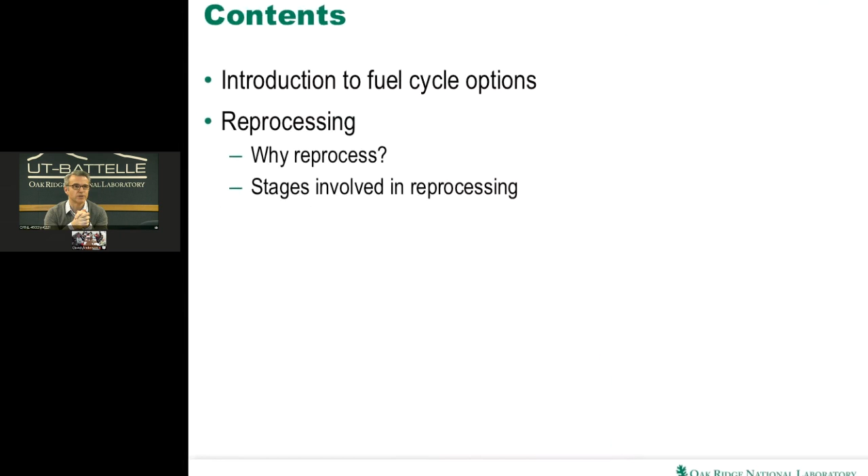So what I'm going to talk about is I'm going to introduce some of the fuel cycle options. There are multiple out there, several hundred, if not thousands, of options. I'm not going to cover all of them, of course, but I'm going to cover a few of the major fuel cycle options that are being considered today and for the future. I'll then move on to talk about reprocessing, why reprocess in the first place, what's the benefit of that, and also some of the stages involved in reprocessing.

And then I'll move on to recycle. Why are people considering recycle? What are the advantages and purposes in recycle? And in particular, we talk about recycling the plutonium and the reprocessed uranium. You can reprocess minor actinides, but that's not a subject of this topic. But just again for background, you can actually recycle the minor actinides too, but I won't talk about that today.

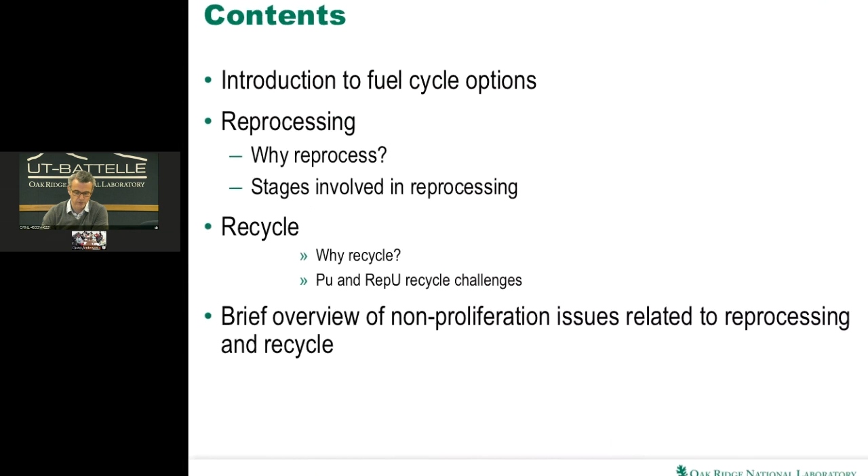And then what I also wanted to do was just touch on some of the non-proliferation issues related to reprocessing and recycle. Again, that in itself is a huge topic that we don't have time to cover today, but I will touch on some of the elements of that and how, despite popular belief, reprocessing can and is being done under a safeguards regime, and there's no issues associated with the non-proliferation. And then finally, summary and conclusions.

So, despite what you may think, I have no accent. It's you guys that have the accent. So, I actually have been with ORNL just for the last about 2.5 years. Prior to that, I was with the UK nuclear industry, as you can probably tell by my accent. I'm not from East Tennessee. I'm actually from the UK.

So I worked for a company called British Nuclear Fuels Limited, BNFL, who actually no longer exists. So depending on the age of the audience, you may never even have heard of them. But BNFL was an equivalent company to Areva. BNFL were involved in everything from fuel fabrication to operating reactors, to then taking the spent fuel and reprocessing it. And that was a commercial business. For many years, BNFL was the largest earner of Japanese yen for the whole of the UK, because of reprocessing. And then dealing with the waste management issues and the back end of the fuel cycle and so on. That was BNFL's business. So I used to work for that organisation.

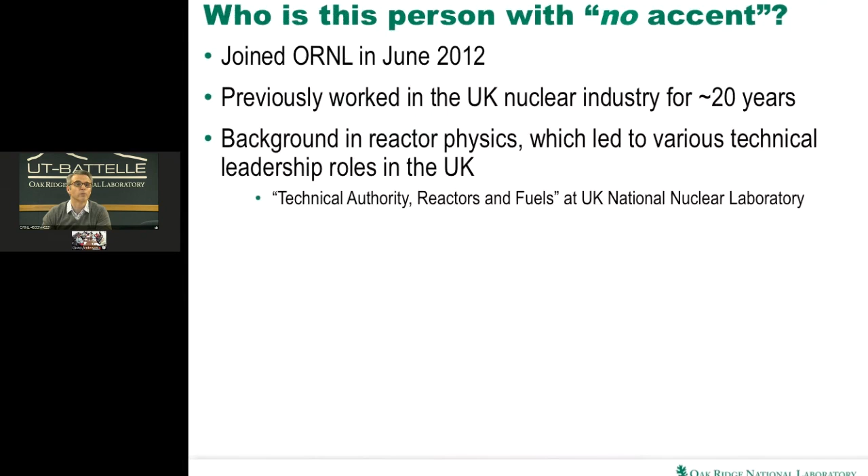And in fact, my background is not reprocessing or indeed anything to do with the fuel cycle exactly. My real background was reactor analysis, reactor physics, but very quickly I got involved in BNFL's broader business, which was plutonium management. And as part of plutonium management and the potential to recycle plutonium in reactors, which I'll talk about shortly, suddenly you get involved in much broader aspects of the fuel cycle, including weapons plutonium disposition and so forth. Eventually I was part of the UK National Nuclear Laboratory, where I was the technical authority for reactors and fuels, advising the UK government on plutonium, but also new nuclear build, advanced fuel cycles, thorium fuel cycles, and a whole range of other things.

I also got involved in a whole range of academic lectures, and I was a Royal Academy of Engineering professor at two of the leading UK universities. But in general, my interests in nuclear are very broad and wide. I'm very fortunate that I've done everything from pressing my own fuel pellets. I've seen plutonium being fabricated into new fuels. I've seen commercial and fast reactor fuel sheared and reprocessed. I've been very, very fortunate in my career. So hopefully I'll try and explain some of those operations and experiences to you today.

Okay, so introduction to the fuel cycles. What are some of the drivers for energy supply? If you just think for a few minutes and put yourself in various people's shoes and look at these different perspectives, whether that may be an operating utility, a government, a vendor, whoever it may be, there's a whole range of different things that you need to think about in terms of energy supply.

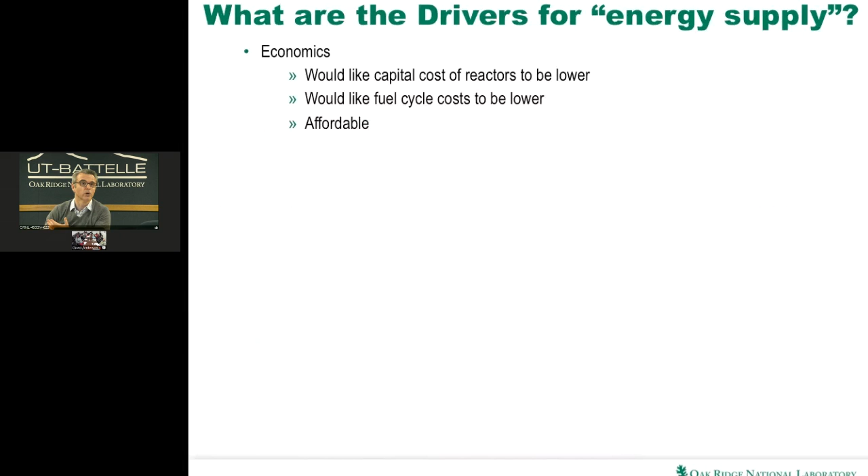And the classic one everybody would typically think of would of course be the economics. You might look at reducing the capital cost, you want the fuel cycle cost to be lower, and of course overall it has to be affordable, otherwise you wouldn't consider it. So that's one of the drivers for future fuel cycles.

Sustainability is becoming ever important. The US is in a very fortunate position that it has a huge supply of natural gas and oil. Not so much on uranium, only producing about 9 or 10% of the world's uranium, but something the US will need to think about in the not too distant future is sustainability and coming up with future energy options, including nuclear, that are sustainable. And I hope we all agree that we need to do more with the resources we have rather than just waste them simply because we have them at our disposal.

Waste management is something that everybody always talks about with nuclear, and quite rightly so, and I'll touch on some of the details later, but some of the drivers for future energy growth from a nuclear perspective are things like repository performance and what's called intergenerational equity: we don't pass on the problems of this generation onto future generations. So dealing with the waste is incredibly important, and how we fix that.

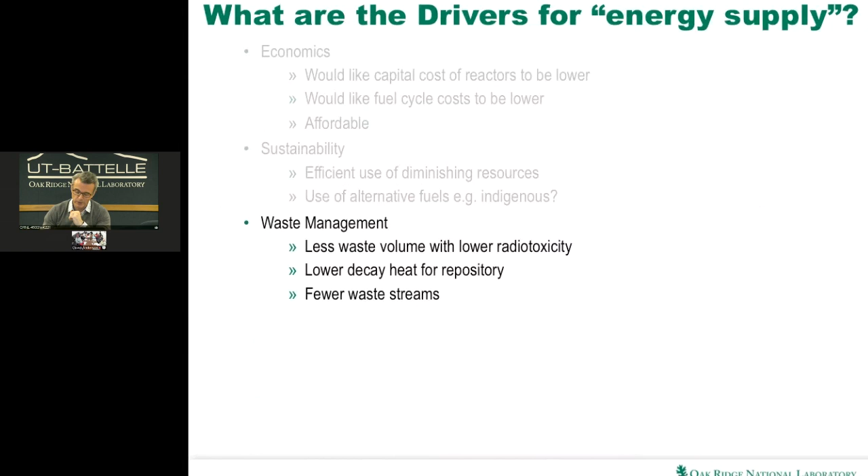Of course, safety is really important, and that includes not only operational safety for the public, but also security and physical protection. And it wouldn't be right to talk about these things without thinking about proliferation resistance. But what does non-proliferation mean? Well, it means making sure bad guys don't get the materials, but also they don't get the technology that they can misuse, and also the knowledge that they can misuse. We have to protect all of those.

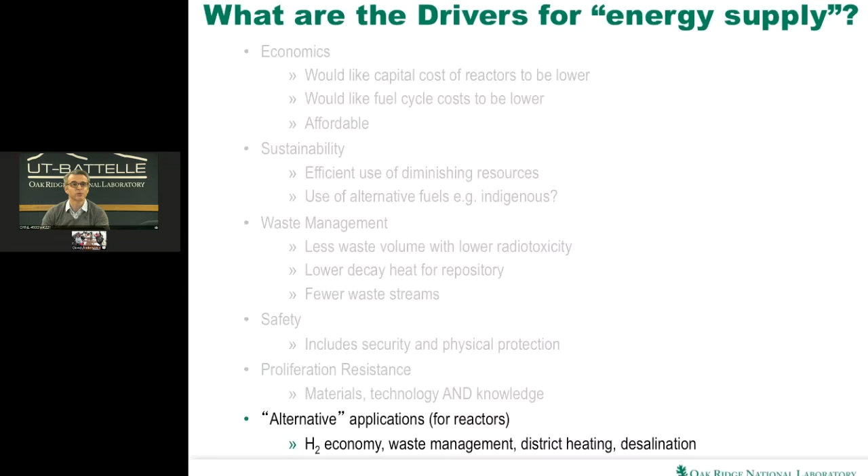And then the final thing we need to think about with energy supply, particularly for the role of nuclear, is broader than just electricity. This is something other parts of the world are desperately thinking about. For example, if you look at the water demands around the world, and potable water in Africa, it's a very small percentage of people who have access to clean water. So things like nuclear for desalination are incredibly important, not just for electricity generation. In some parts of Europe, in the Baltic states, district heating is incredibly important, and also things like a hydrogen economy, even for transport. So all these are broader concerns, questions, challenges we have to address when thinking about nuclear.

And what that means is when evaluating a fuel cycle option, we need to think of it from all these people's perspectives: the operators, the governments, international agencies like the IAEA, but also regulators and vendors, people who want to make money out of this, as well as for the good of mankind. The reason I mention all of that is that if we're not careful, we end up focusing on the best technical solution, not necessarily the best economic solution, or we don't think more broadly about how else this nuclear fuel cycle can have benefits. So that's why I wanted to mention that up front.

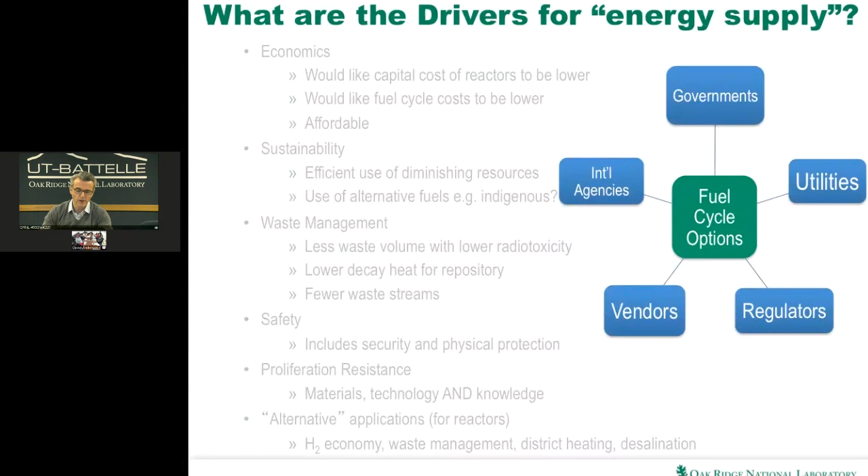But the key thing here is just to bear in mind that when you look at the once-through fuel cycle, everybody thinks of that as being complete. Well, in fact, it isn't. We as an industry, as a nuclear industry, haven't yet even demonstrated a once-through fuel cycle because we haven't yet done the ultimate disposal part of it, which is one of the major challenges for nuclear. So when people start talking about reprocessing and all these fancy future fuel cycles, you would also have to bear in mind that we haven't yet done the once-through fuel cycle completely either. So there's still plenty of challenges there.

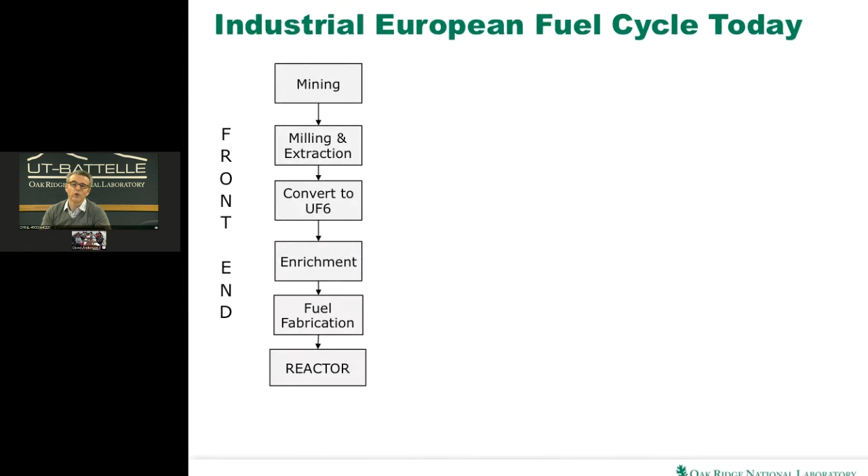So if we compare and contrast then, I just talked about mining, milling and extraction, converting to uranium hexafluoride, enrichment, then on to making fuel, and then all the way through to reactors. What we call that is the front end of the fuel cycle. So anything leading up to the reactor is typically known as the front end of the fuel cycle. If you have a front end, then of course naturally you have a back end of the fuel cycle, and this is where the options kind of diverge.

So what we can do is we can reprocess or we can store indefinitely. And as I just illustrated on the previous slide, the store indefinitely is the current once-through fuel cycle, the US fuel cycle. If we're to reprocess, in Europe, we typically have generated 3 levels of waste streams known as low-level waste, intermediate-level waste, and high-level waste. The classifications aren't so important, but I just wanted to demonstrate there's a whole range of waste streams.

Two of the major byproducts we get from reprocessing, though, which we can do something else with subsequently, i.e. the recycle part of it, is we generate uranium and plutonium from the spent fuel. And typically we can store that, and that's what's been happening, for example, in the UK. But alternatively, we can take that uranium and feed that back into the uranium fuel cycle and re-enrich and so forth. Or we can take the plutonium and make that into what's known as MOX fuel, mixed oxide fuel of plutonium and uranium, and directly put that through a fuel fabrication process and back into the reactor. And those are the stages I'm going to go through in a little more detail, but I think it's worth giving you an idea of what that layout looks like before we start in the details.

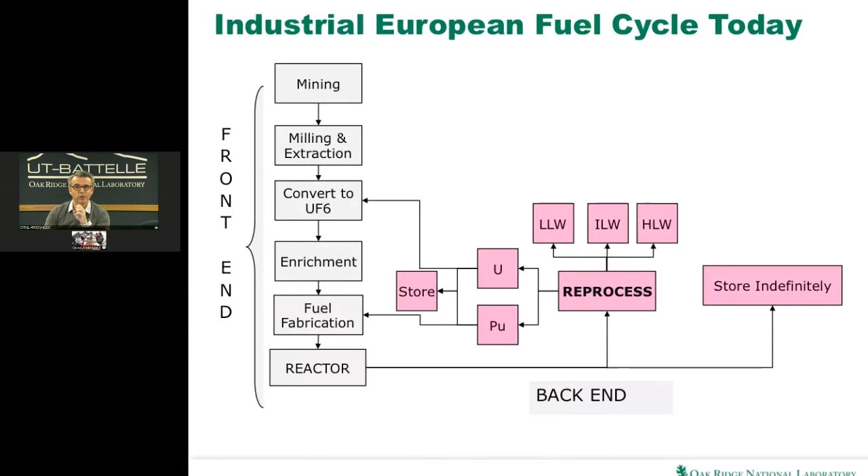So, there's a couple of different phrases you sometimes hear with fuel cycle options. Simply put, they're either open or closed. So the open fuel cycle, or the once-through fuel cycle, as I said, is the US. Basically take the uranium ore out of the ground, make it into fuel, put it in a reactor, put it down the hole in the ground. That's known as the once-through or the open fuel cycle.

The full recycle option, but this isn't where we are today, this is where you need fast reactors and these fancy future reactors, is we again do the same thing, recover the ore, make the fuel, put it into a reactor, but now we then recycle. We separate, first of all, the good stuff and the bad stuff. The bad stuff we don't want, we put it down a hole in the ground in the repository. The good stuff we recycle as fuel. And that's known as the closed fuel cycle. So the open fuel cycle, no recycling or conditioning of the used fuel, which really means low uranium utilization.

On the other side, though, the closed fuel cycle is we can multiply reprocess the materials as many times as we can, and also transmutate the minor actinides, as I mentioned, is one option, and that's complete uranium utilization. It's as much as we can possibly do. And just for your complete understanding, there are stages in between, which is typically called the modified open fuel cycle, or limited recycle as it's also known. And that's pretty much what France is currently doing.

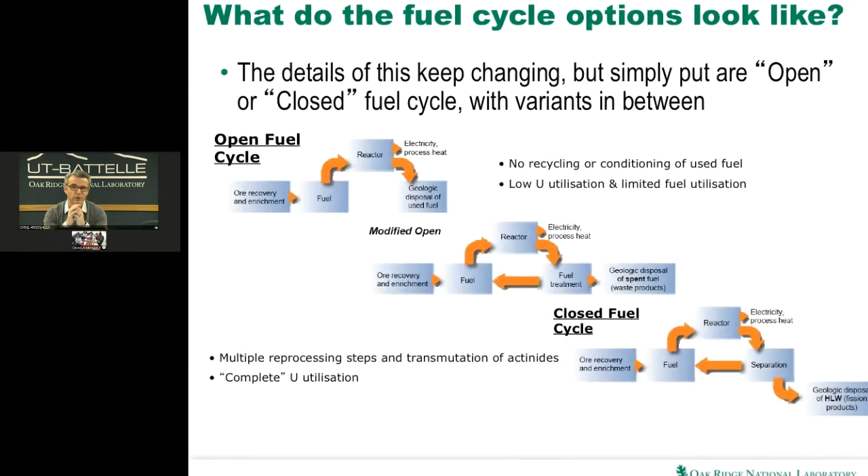France is right in that middle one in the modified open, because what they're currently doing is they're taking the plutonium and the uranium and recycling it, but not to the extent where you can do that infinitely. They're only doing that in light water reactors. And again, I'll touch on some of the details later, but you can only do that once or twice because of the fissile quality of the material recycling. And then the minor actinides and the fission products are then disposed of directly. So that's where it's modified.

So some of the drivers that are being considered right now are things like we need better utilization of limited resource. Despite what people say, there are only finite resources out there for uranium, just like oil, gas, and whatever. If you look at the OECD and the IAEA, they quote something like 60, 80, maybe up to 100 years of known uranium resource that's available today based on a certain growth scenario for nuclear over the next few decades.

But the important thing to bear in mind with that is that that's what's known today. Every time somebody's gone and prospected and looked for new uranium, they've found it. But you don't go and look for it unless there's a shortage, and there is not a shortage today, so people just don't go and look for it. Same with any other commodity.

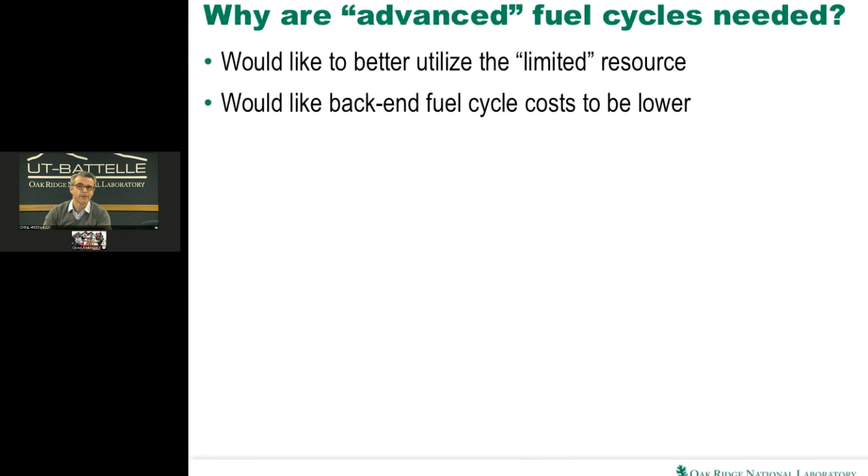The second driver for these advanced fuel cycles, we want the back-end fuel costs to be lower. Things like the waste, which I'll touch on shortly, and the impact that may have on repositories and the cost that drives your repository. There's plenty of good reason why you want to recycle. There is a lot of perceived proliferation risk posed by reprocessing and plutonium separation. I say perceived because the risk really is there for sure, but the perception is almost that that's a greater risk than other fuel cycles.

And again, I'm not going to go into it in detail now, but if you Google or look up work by a guy called Charles Bathke, then you will see things like material attractiveness, figure of merit, where basically analysis by people like Los Alamos and the other weapons labs illustrates that all fuel cycles, all of them, generate material that is potentially weapons grade material. What that simply means is, therefore, every fuel cycle needs safeguards and security. So that's not to say plutonium is any worse than anything else.

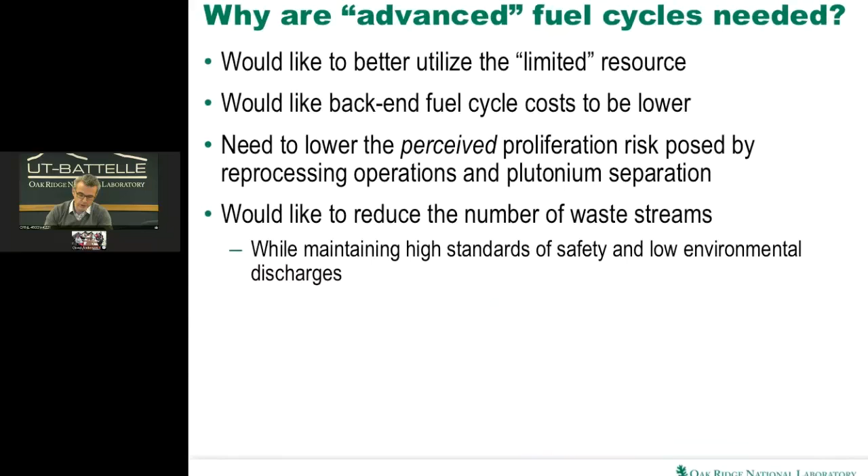For example, in the uranium fuel cycles of today around the world, where plutonium is not separated, we still have to have safeguards and security. So just to illustrate, there is not a great game changer there. We're also trying to simplify the number of waste streams and reduce the impact on the environment. And also in the meantime trying to maximize the benefit and the improvements we have in the existing fuel of today.

One point to bear in mind though is that for these ultimate long-term future fast reactor fuel cycles and these completely closed fuel cycles, you do rely on not just the fuel cycle technology but new reactor technology. So there's an awful lot of research, development and commercial case to be made. So things like developing future fast reactors or molten salt reactors are part of that. Okay, so that's just trying to set some of the scene, some of the language, and I'm going to go now into more detail and talk about each of the components of reprocessing and recycle.

So what is reprocessing first of all? Well, reprocessing is the separation of the reusable fissile material, typically the uranium and plutonium, and the recycle of that in new nuclear fuel. In many ways, this reprocessing and recycling nuclear is no different to the way we hopefully all at home recycle our garbage and extract the good stuff, the plastics, the bottles from the traditional household waste. It's just taking the good stuff out, separating the good from the bad, and recycling the good stuff. So this is what's essential to close the nuclear fuel cycle. You have to have reprocessing.

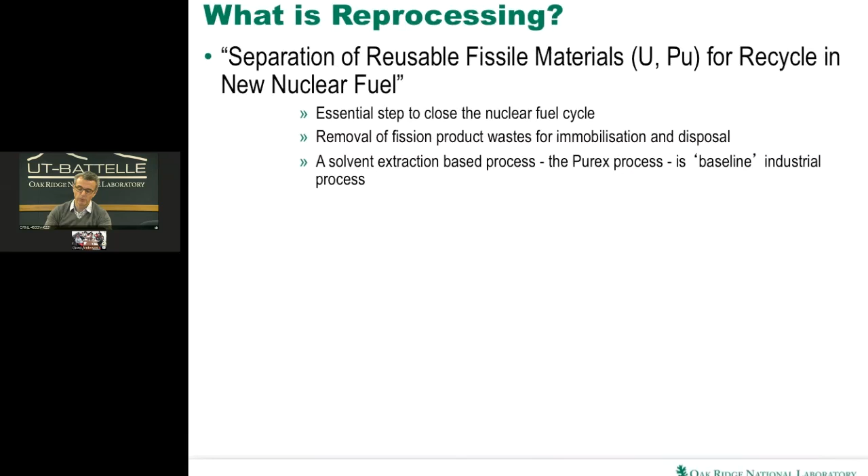Of course, if you fission fuel, uranium or plutonium in a reactor, that fission process generates fission products, and we want to get those out of the fuel. We don't need those anymore. They're definitely a waste product. We get those out, we immobilize and dispose of that, and all of that separation process is based on solvent extraction, a chemical process known as Purex, which stands for plutonium and uranium extraction. And that's the baseline industrial process of today that's used in the UK, in France, and in many other places.

There are other options other than Purex, and I'll touch on those later, but things like COEX means co-extraction. So where there are concerns that maybe plutonium could be diverted for a weapons program or some other mission, future fuel cycle options are looking at co-extraction of uranium and plutonium together so that you don't generate pure plutonium. And also looking at things like where the plutonium is kept with the minor actinides and the fission products under a Urex, and there's a whole range of other things. I'll show you some of those later.

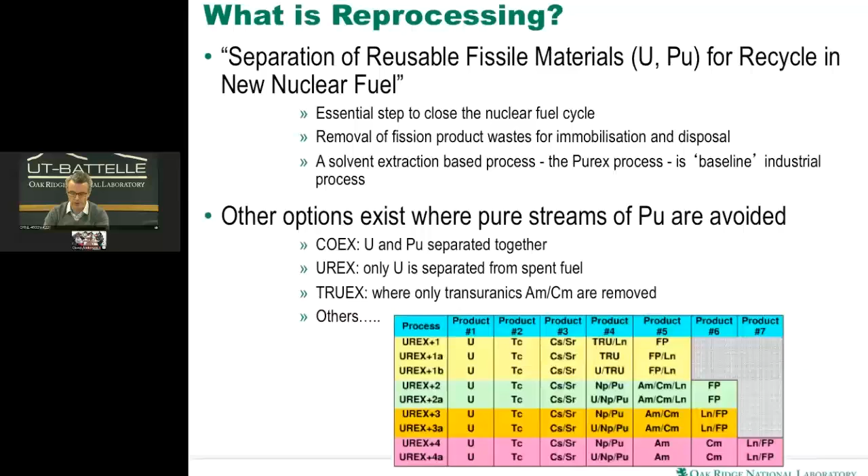So why bother reprocessing is often a question we hear, because not every country does it, and why would they? Well, the first thing is, historically, it's typically been because of the weapons program. If you look at the US, it has reprocessed historically primarily to extract the plutonium for the weapons program. The UK also did exactly the same thing; it was all about reprocessing to get the plutonium out of the fuel for the weapons program. So that's part of it.

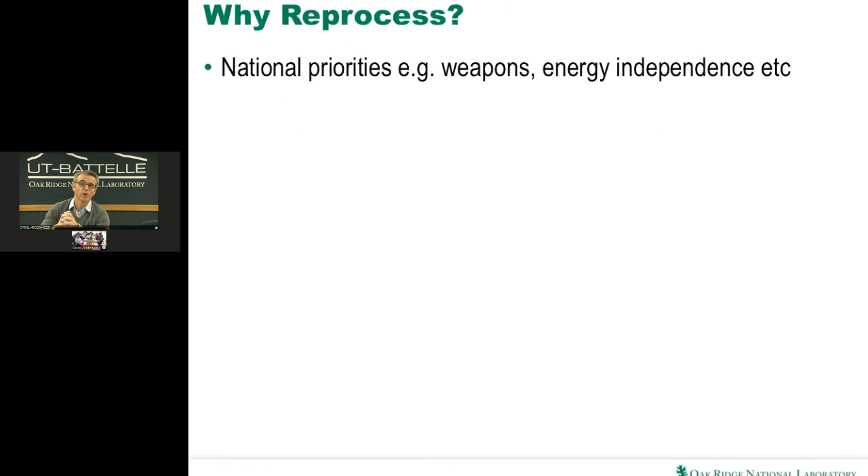But back to what I started the talk with, and that's energy policy and energy supply. One of the things that, for example, Japan faces is that Japan has no indigenous oil or gas or coal. So it has to do something to ensure energy independence, and that's why Japan is focusing very much on reprocessing and recycle. When they buy their uranium, they want to maximize the use of that uranium, and things like reprocessing enable them to do that, maximize their resource.

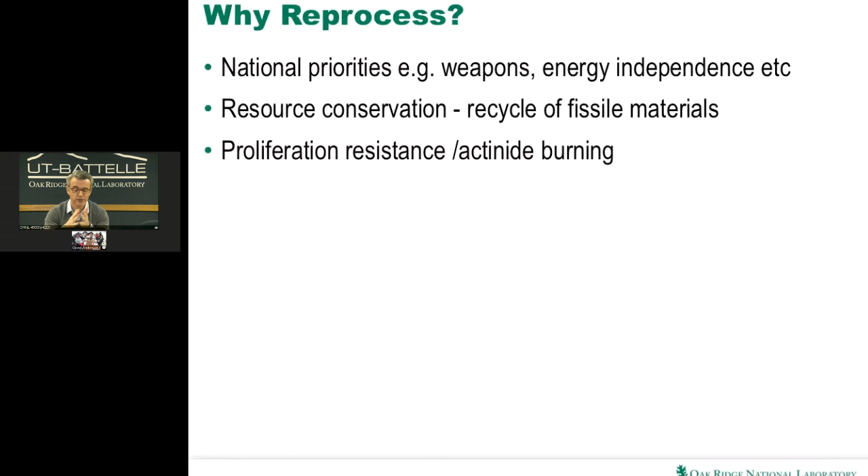I've touched on this one already, resource conservation and recycled fissile materials. Reprocessing, in fact, does have some proliferation resistance benefits with regard to the burning of the actinides in one sense, but also if you have separated plutonium for all sorts of reasons, then you can reprocess and recycle that to destroy that plutonium too. So that's another way of looking at it. You actually are destroying the plutonium.

Something I'll touch on and show you a couple of graphs shortly, in more detail, is you can use reprocessing to minimize the volume of waste, the volume of material that you're going to put down the repository for ultimate disposal. And similarly, spent fuel management: in spent fuel, you end up with a lot of fission products and potentially the weakness of the spent fuel. So potentially by reprocessing, you remove those fission products, you remove that weaker structure, the fuel pins and fuel pellets, and you then recondition, in a sense, into a repository condition.

And then with somebody like the UK, one of the reactor options they have was the Magnox reactors, the old graphite reactors. And in fact, they have to reprocess that material because the cladding that surrounds the fuel is actually a magnesium alloy. And it has to be kept under water because magnesium, we've probably all done this in high school class, try to light magnesium ribbon, it burns tremendously. That's not exactly a reaction you want to see in a nuclear fuel.

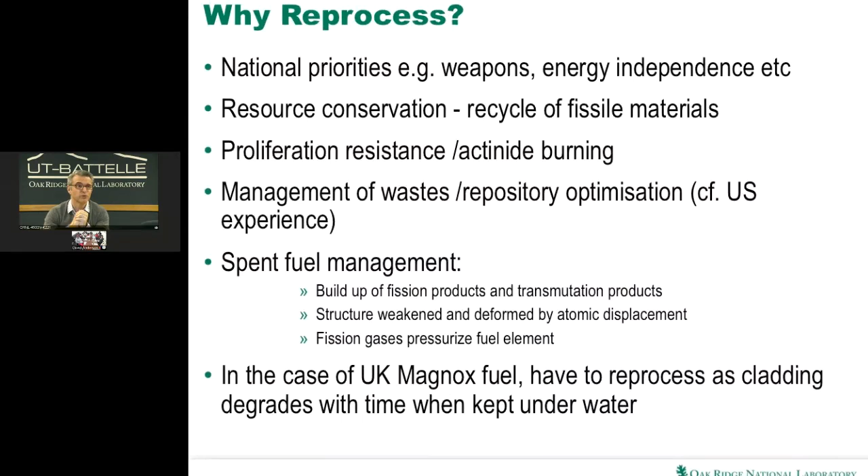So that means you cannot allow it to be exposed to air, so you have to keep it under water. Unfortunately, when you put magnesium alloy under water, it dissolves in water. So therefore, that's also not a good condition. You don't want your fuel to be dissolving in water. So that's why they have to reprocess, to put it in a much more stable form. So there's some of the drivers outside of economics.

So the obvious one to answer then, well, is reprocessing economic? And the answer is no. Well, yes, but the answer actually is maybe. It depends on so many different things. It's not easy to say for sure. And that's why some countries have gone down that route and others have not, as well as the drivers based on country policy. So it depends on a whole range of things. Often the approach to economics is one of the drivers.

The problem with a lot of economics, particularly nuclear economics, is you get this thing called discounted cash flow analysis. And what that really means is that anything a long time in the future, the value of that money is discounted away. So if you have an outlay in the future of, say, $500 million for a decommissioning project, or a repository is needed, if you put a small amount of money aside today, that money will grow by putting it into the banks or investing it. And so you don't need to put your $500 million in the bank today. You just put a small amount of money and watch it grow over the next 50 to 100 years.

So that same approach is applied here, where all the direct disposal costs are put off so long in the future that it discounts all the actual costs away. The costs kind of disappear.

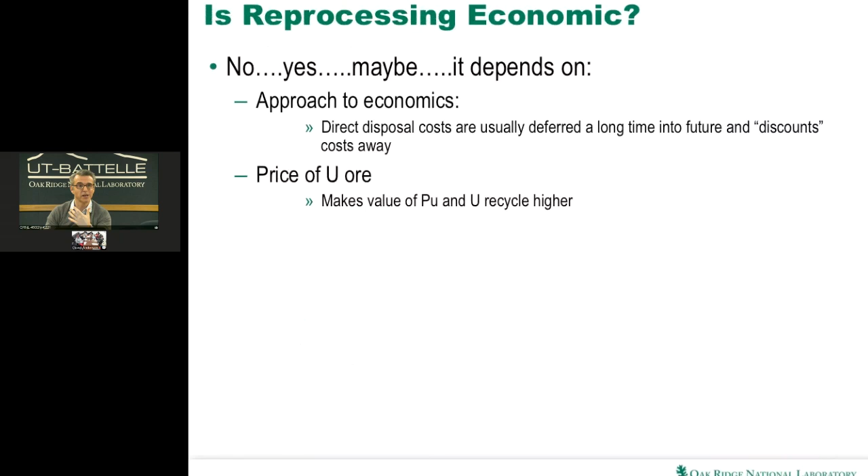The other thing that drives the economics of reprocessing as a yes or no is the price of uranium ore. If the price of uranium is very low, which usually coincides with lots of uranium around, then why recycle? We don't need to be so concerned with the availability of that resource. But if the price of uranium goes up, then suddenly the value of that reprocessed uranium and the value of plutonium to recycle also goes up.

The other thing as well is that you can achieve higher burn-ups in light water reactors. What you tend to find is that if you need to get more energy out of your fuel, you need to put more fissile material in there. In the case of uranium, you have to pay for that by enriching it. The more you enrich, the higher the cost, and that goes up exponentially.

Whereas with plutonium, if you've already made the decision to separate that plutonium out, plutonium is free issue at that point, because when you manufacture a fuel with plutonium, whether I put 1% plutonium into that fuel or 10% plutonium into that fuel, it actually doesn't increase the cost of that fuel production at that time. So what it means is I can get more energy out by doing that.

Cost of spent fuel, that obviously drives things also. But in general, the cost of the two, keeping irradiated fuel in a repository or the cost of reprocessing, they're comparable. And again, I'm not going into the details here, but these are some studies from the OECD, and I just updated some figures from 1993. This just shows and compares the direct disposal on the left with reprocessing on the right.

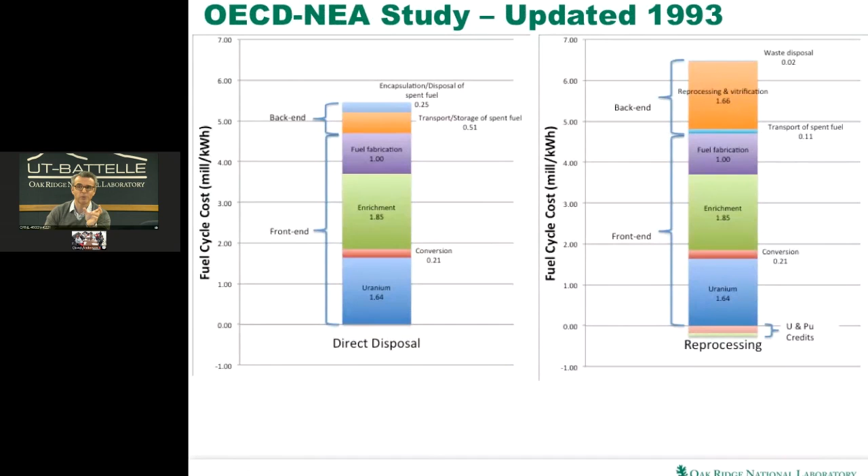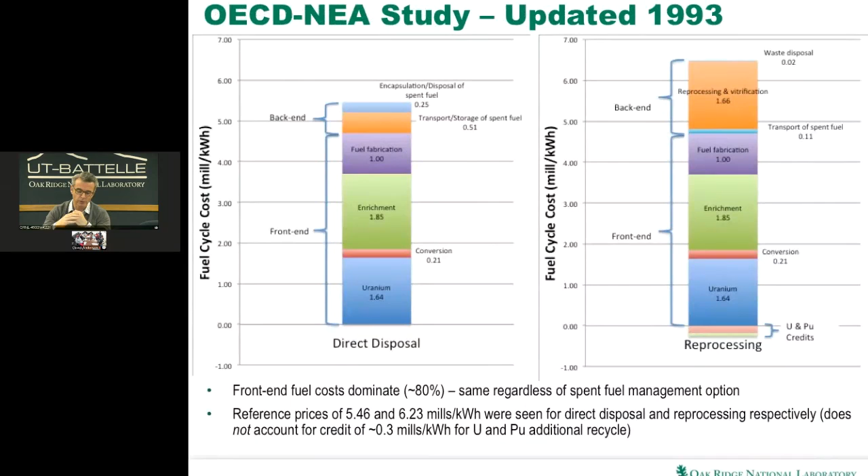Of course, all the front end of the fuel cycle components are exactly the same. It's only the pieces at the back end at the top of that histogram that change. And what you find is that the front end costs dominate. About 80% of the overall fuel cycle cost comes from fuel costs, regardless of which option you choose. And if you look at these two examples, we've got a comparison of about 5.5 mils per kilowatt hour versus 6, as you can see on the left and the right.

What the chart on the right takes no account of, though, is that the material that comes from reprocessing, the uranium and plutonium, we can recycle and reuse, and therefore that's an avoided cost of us having to buy more uranium. That's not in that chart. That equates to about 0.3. So when you look at the value overall, they're pretty comparable, within about 10% of each other. And of course, the things on the left can go up or down, the things on the right can go up and down. So within uncertainties, they're pretty much equivalent.

So when we talk about reprocessing and recycle, which bits are we talking about recycling and which bits are we talking about throwing away? Well, in fact, more often than not, what's typically been talked about is just reprocessing and recycling the fuel pellets themselves, the actual fissile material and the pieces that are inside the mechanical hardware of fuel.

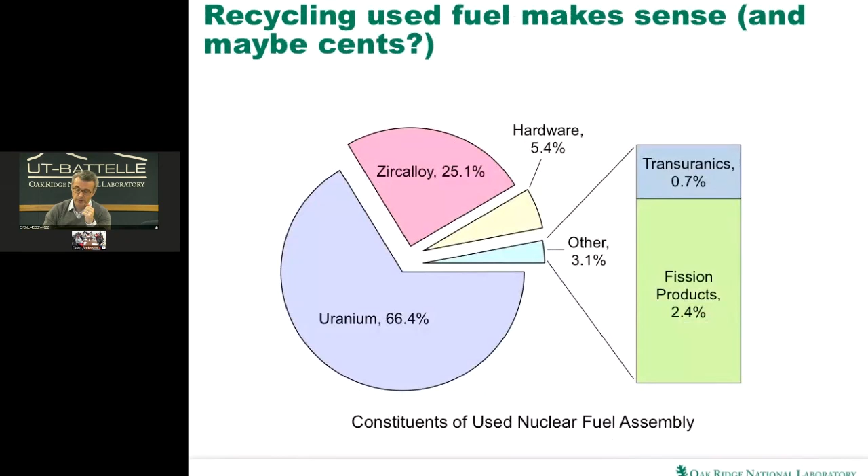But in fact, here at Oak Ridge, working on a US Department of Energy program, one of the things that's also being looked at is recycling the zircaloy, the actual cladding that's in the fuel and the hardware, and actually recycling the metal as well as the fuel inside those metal components. So that's something else to bear in mind. It's not just necessarily recycle and reprocessing of the fuel material.

Well, it's the radioactivity you can consider either as the dose to an operator, or the dose to the public, or the dose to the repository. Or alternatively, you can look at that as meaning the decay heat, the amount of heat that spent fuel is generating. So what you find is that the vast majority of that material in that spent fuel is actually producing hardly any of the decay heat or radiation in that fuel. In fact, the majority comes from the fission products.

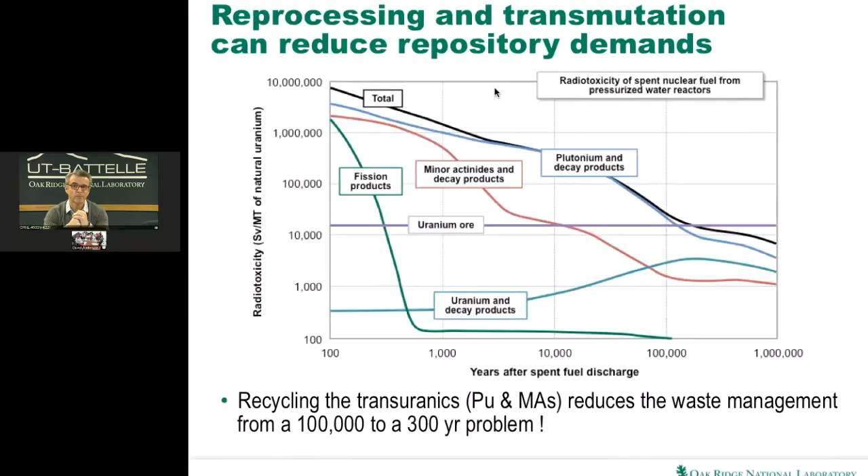because after about 300 years you're back to that background level of uranium ore radioactivity. Whereas if you didn't do that, it takes you 100,000 years or more before you get to those background levels. So that's what that graph shows you. It's showing what I said earlier in a slightly different way.

So the US is considering how to move to one of these advanced fuel cycles today. One of the programs of work within the US Department of Energy is something called the Fuel Cycle Options Campaign. So we're looking at a whole range of fuel cycle options, whether that's with fast reactors or thermal reactors, with thorium or with uranium, and a whole range of other things. And again, you can find those reports and studies on the web.

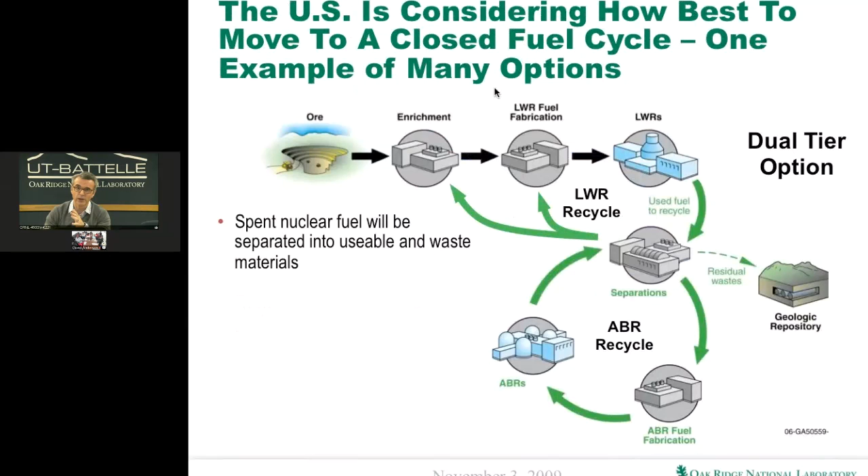But the key thing here for the US is those options are being considered. The once-through fuel cycle is still the fuel cycle of choice. It produces 20% of electricity in the US, so at the moment there's no point to move away from that. So again, I'm not going to go into that in detail, but just wanted to let you know there are other options out there that the US are considering today.

So just to demonstrate some of the steps in reprocessing, and again I'll show you some pictures and diagrams to bring some of this home, I hope. What you're seeing on the right hand side is a picture of the Sellafield reprocessing plant in the north of the UK. You're seeing the building right in the centre there with the red side; they're not chimneys, that's the side of the building. That's the thermal oxide reprocessing plant known as THORP, at Sellafield in the UK.

So at the bottom of that picture you see a square building. That's where the fuel is received and stored. So that's the first step, receipt and storage. The second stage after that is what's called the head end process, and I'll show you some pictures and schematics in a second. So the first step after the material has been received and stored is then to expose the fuel pellets themselves from inside the cladding.

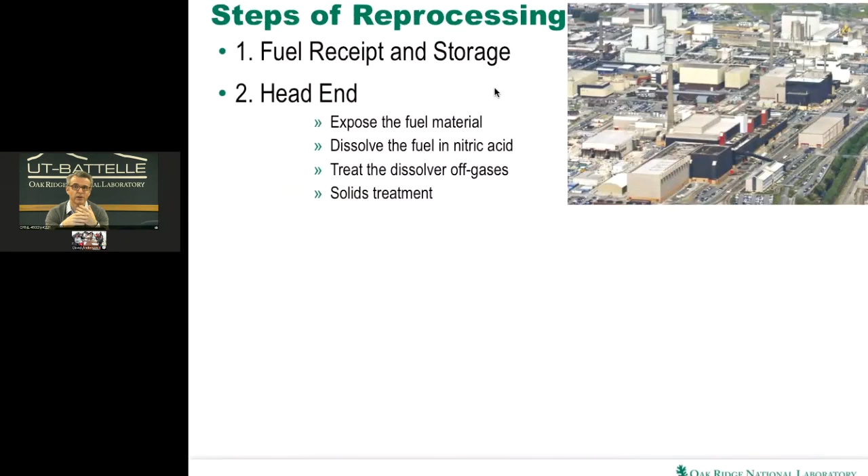So the first thing that has to happen is we have to expose that fuel by shearing it and basically shaking out, removing the fuel from the inside. We then dissolve those fuel pellets in nitric acid. Of course, by doing that, we generate some off gas. We have to treat the off gas, and then we dissolve and treat the solids.

The first two steps, that receipt and storage and head end, the steps are usually the same in terms of that they happen, but depending on the fuel type or reactor type, there may be some additional steps. And again, I'm not going to go into that, but I just wanted to flag that if you talk about reprocessing fast reactor fuel, the receipt and storage and head end processes will differ from what I'm about to describe now, but they are similar processes still needed.

The third stage, after you've received the fuel, you've dissolved, you've chopped it up, is that you now need to chemically separate all those elements that I described. And then once you've separated them, you need to purify them to put them in a form that can be reused if appropriate. Typically that's done using the Purex process, as I mentioned earlier, using solvent extraction, and that's with chemical separation. But again, just a little marker here, there are alternatives for things like fast reactor fuels, which is known as pyro reprocessing, using something like a molten salt or electro refining. I'm not going to go into that today, but just to flag that there are alternatives.

And then once you've gone through all that, you'll need to store that material for potential future reuse. And the material that you're no longer going to use, you then have to do something with it, like waste treatment.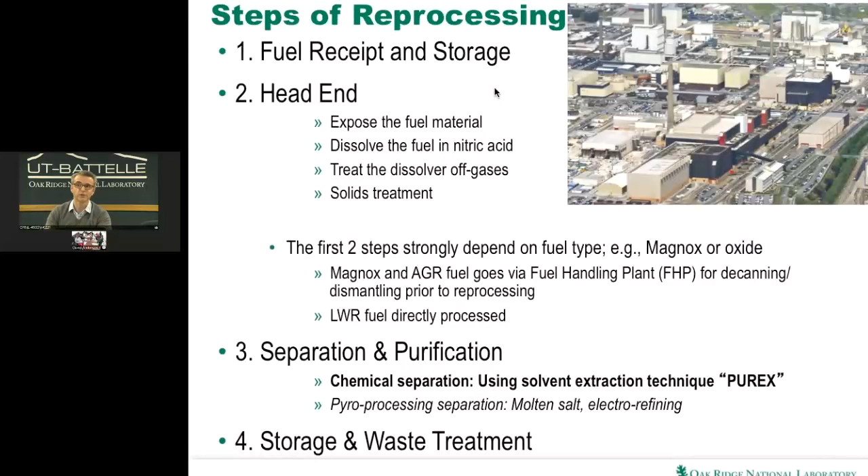So this is just to show you some schematics, and I'll show you some photographs in a second of what this looks like. But just stepping through receipt and storage, where the fuel is brought in from overseas or from elsewhere, from the reactors, brought into the reprocessing plant. The cask is then loaded into a spent fuel pool. The pool then provides that radiation barrier and the heat barrier. Then the fuel is removed and stored until it's ready for the reprocessing plant, and then that's lifted up to where it can be sheared, chopped up, and I'm going to show you some photos of that shortly.

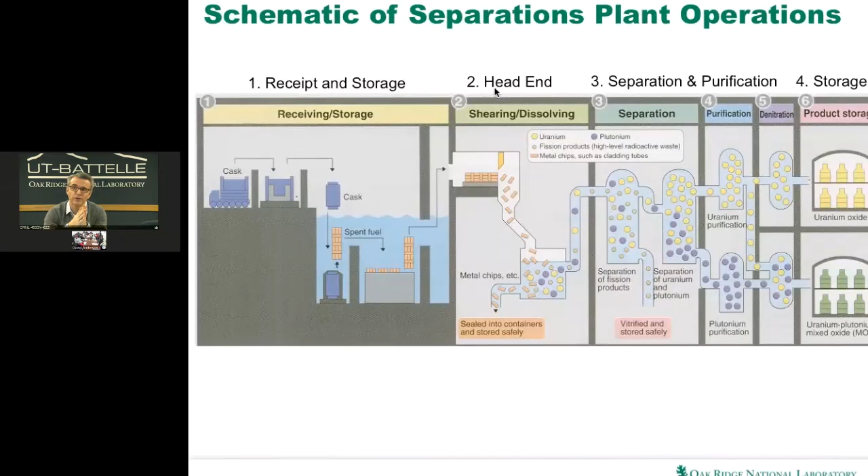Then the chemical separation takes place in stage 3 there, then purified, because the uranium goes one way, plutonium another. Then it's purified and stored if necessary, and then the waste products go a different direction.

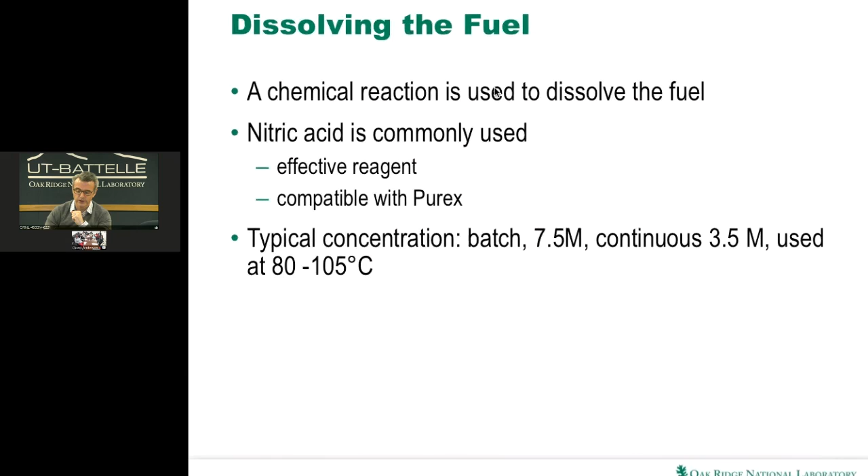So in terms of dissolving the fuel, as I said, once you've actually chopped the fuel up and you've now exposed those pellets, it's a chemical reaction that's used to dissolve the fuel, and it's typically nitric acid. And when you look at some of the chemical processing that's involved in reprocessing, you realize just how difficult this whole process actually is. You've got something like 7.5 molar nitric acid used at typically up to 100 degrees centigrade in a very, very strong radiation field. So all of this is done behind tremendous shielding, and when you start thinking about the heat, the dose, the chemical interactions, there's an awful lot to take into account from a safety perspective.

There's also potential risk of that material being concentrated and going critical, so they actually do things like put gadolinium poisons in there to prevent the risk of criticality. And in fact, for other reprocessing options, for example the thorium fuel cycle, there are other chemical reagents that may come into play, something as strong as hydrofluoric acid, which is particularly corrosive. So you can again see some of the challenges that you can face in a reprocessing facility.

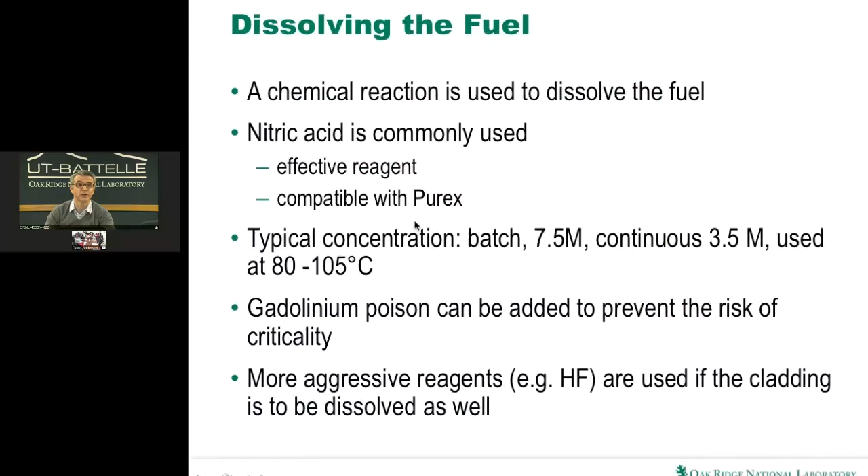So the way this actually works is, and again, it's easier for me to show you in a diagram, how this whole chemical process works, it's a liquid extraction process where you've got two phases, and those two phases being immiscible, the material then gets transferred across from one phase to the other phase.

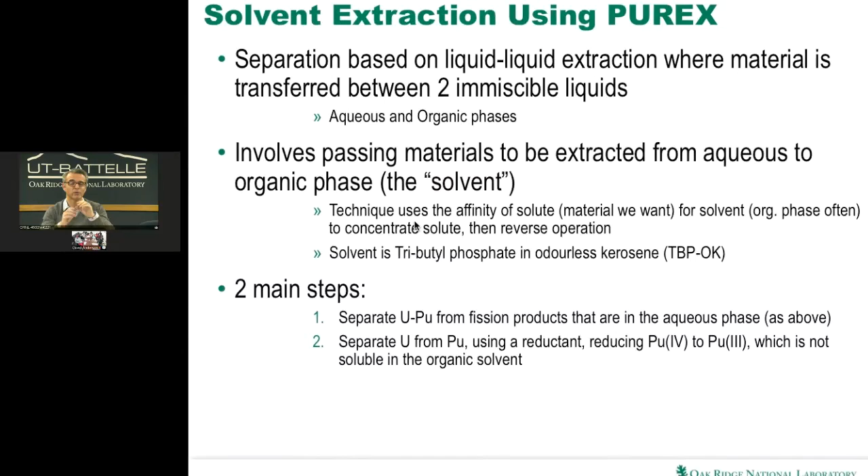Towards the solute, the material that we want. And again, I show that in a picture in the schematic. It's much easier to see. But the first thing is that we first of all separate the uranium and plutonium material from the fission products and the minor actinides, so they go one way, and you'll see that in a second. And then once we've done that, we've got these two bulk materials. We're then able to concentrate on the separation of the uranium and plutonium from each other in a next stage of the process. So again, the easiest way to see that is in this process here.

So at the bottom we've got the aqueous solution. You've got that nitric acid and the fission products and the uranium and the plutonium and the minor actinides all mixed together, and then you add to it an organic solvent on top, something like tributyl phosphate and odorless kerosene, the two typical chemicals that are involved in this. And what then happens is, by those two being mixed, you get this solvent extraction process where the material that you want, the uranium and the plutonium, is drawn across into the upper phase, leaving the fission products and the other materials behind in the lower half.

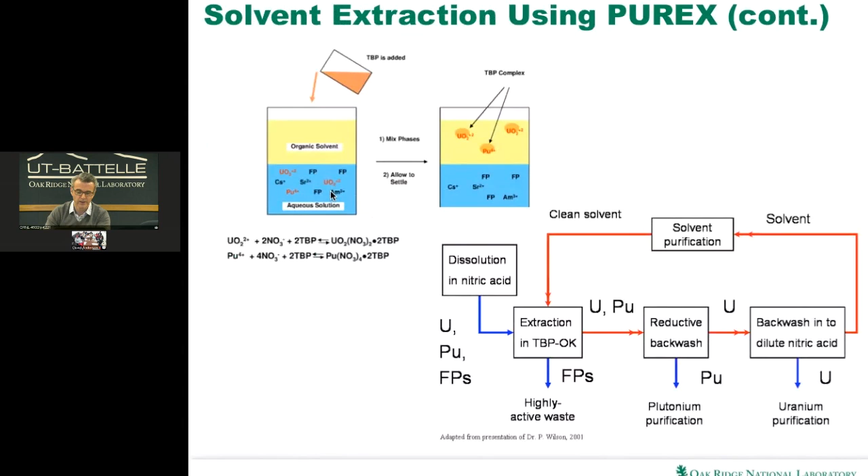So that's what you're seeing again here. Just to reiterate, the extraction in TBP/OK, where the uranium and plutonium go one way, the fission products go another. Then what you can do is change the acidity of that separation material. You can then have the uranium go one direction, the plutonium drops out of that, and then you can purify. I'm not going to go into the details, but you can hopefully see the various stages.

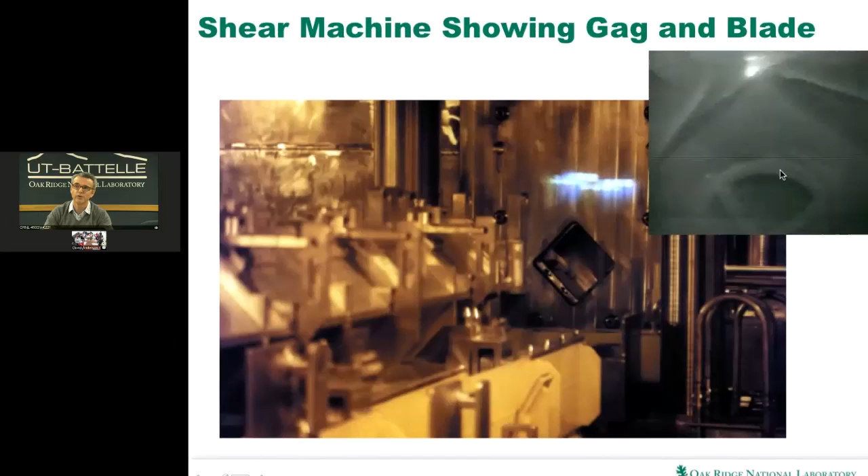And in the photograph on the right hand side, you hopefully can just about make out a fuel assembly here, and that's the blade coming down to begin to chop the fuel. So at the top of this chute up here is where that fuel is being chopped into typically 1 to 2 inch pieces, and that will then fall down into the collection basket at the bottom, and that's where the dissolver is waiting.

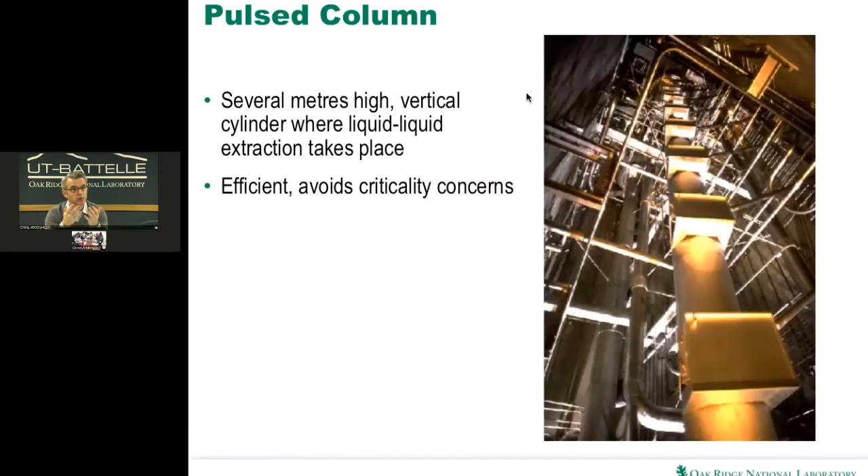And the dissolver is basically a stainless steel basket which is immersed in the nitric acid. And so when that's loaded into nitric acid, the fuel is dissolved and comes away from the cladding pieces, the hulls as they're called. And then when you lift out the basket, the hulls, the cladding, is left behind in the basket, and in the liquor that's left is your uranium, plutonium, minor actinides, and fission products, all dissolved.

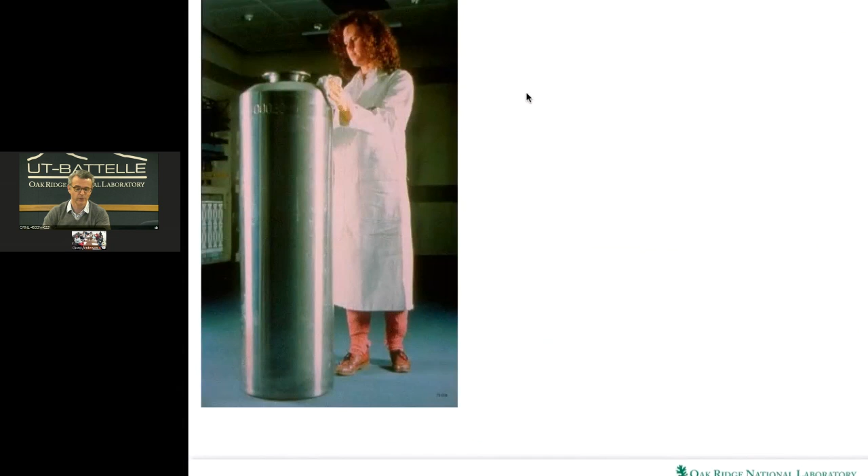And the high level waste, as it's called, those minor actinides and fission products go into a container. Typically, this again just to illustrate size, just to be 100% clear, if that really was high level waste, she wouldn't be standing next to it. It's incredibly active. I think people say if you run from an infinite distance, by the time you get to it, you'll be dead anyway. So that's clearly something not to be messed with.

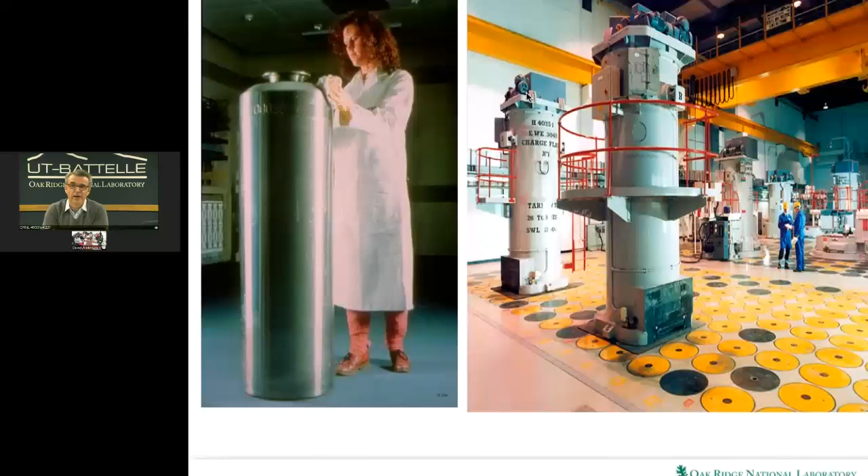But what's interesting though is that if you look at the picture on the right hand side, that's actually the high level waste store at Sellafield. And I've actually stood on top of that on 2 or 3 occasions during my career. Below your feet there are those canisters stored on top of each other. I'll show you a picture in a second. But the radiation fields, because of concrete barriers and so on, are perfectly fine. You can stand on top of that area.

So the spent fuel volumes are incredibly small. You can do the calculation yourself, but the estimates are that if all of your electricity energy demands came from nuclear, the amount of high level waste that you would generate in your own personal lifetime would fit inside a small paint canister. So that's why it's such a small amount of volume.

But as I mentioned, there are other wastes that come from nuclear, and so there are other processes needed to deal with the other wastes, whether that's decommissioning wastes, the intermediate level waste, which are these hulls, these material and mechanical pieces, and they're typically just overpacked with a cement or a grout, and then again will be sent for ultimate disposal. But still, you still need that repository.

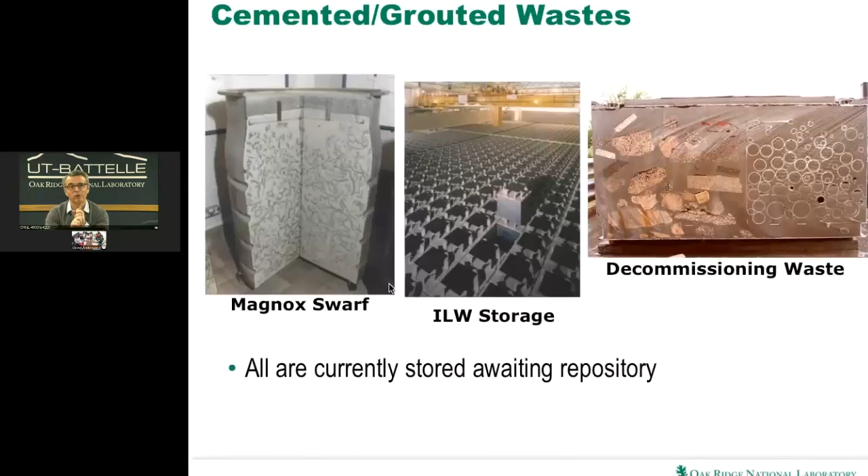And one thing I'll underline at this point is it doesn't matter whether you are going through a once-through fuel cycle or a reprocessing fuel cycle or the ultimate best ever fuel cycle you can think of, you will always need a repository. The only difference is how big that repository will be. So that's a kind of introduction to the reprocessing side. So I'm going to talk about the recycling side.

I think I've touched on most of these already, but why recycle? Because we want to get the fissile material. And this really harps back to the 1970s and the oil crisis. There was a big push for nuclear, and therefore a concern about demand on uranium ore. And so the concern then was, well, how are we going to address that? And fast reactors and recycle was the main driving force towards that. And despite the oil crisis never quite coming to fruition as everybody expected or feared it would, several countries did start out on that route: Belgium, France, Germany, etc.

And so particularly those countries have looked at and are recycling their plutonium from that interim kind of reprocessing stage. They're reprocessing and recycling that plutonium in existing reactors. So that's that modified open fuel cycle, limited recycle stage that I mentioned earlier. And again, the UK has something like 100 plus tons of separated plutonium, with nothing currently planned apart from hopefully they'll put it in future reactors.

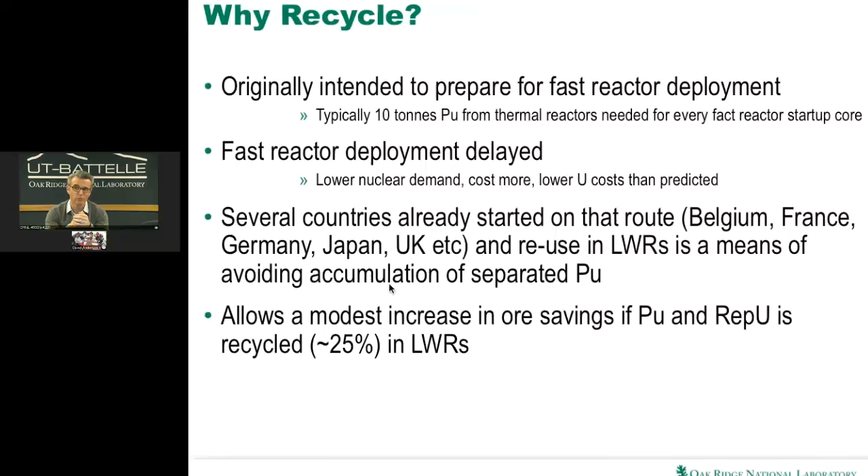Important point to note here though is that if you only recycle the plutonium and the reprocessed uranium in light water reactors, you will only see about a 20 to 25% improvement in your ore savings. To get that huge, tremendous improvement, you really do need to go for full multiple recycling in fast reactors. So that's why that isn't quite getting to the full potential.

The other thing just to bear in mind is that on the current uranium markets, the reprocessed uranium can be economically competitive with buying uranium ore fresh. So again, in France, a lot of that's actually already going on. They are recycling not only their plutonium but also their reprocessed uranium.

The thing is though, not all plutonium is created equal. So you often hear people talk about weapons grade plutonium or bomb grade plutonium or civil grade plutonium and all these other things. And it is different, and I just want to give you a very quick explanation as to why it is different. So plutonium is generated in a reactor. It's the only place it's generated. It's not natural, and it's captured.

It's produced by uranium-238 neutron capture. So uranium-238 captures a neutron, becomes neptunium-239, decays to plutonium-239, and then it can go up through that chain, and it can capture to become Pu-240, 241, 242, and so on. So the chance of that neutron being captured in that U-238 is very much dependent on the reactor environment that it's in.

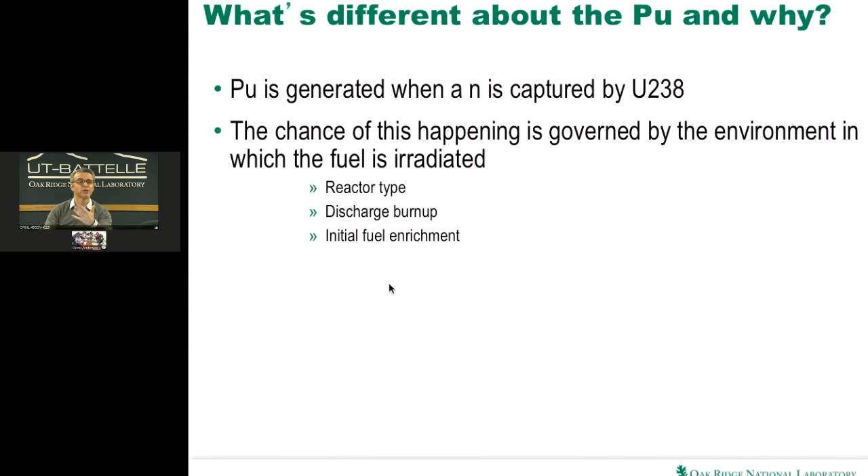And it also depends on how long the fuel is in the reactor for, because the longer it's in, the more chance of capturing a neutron, and therefore the more plutonium is produced. But if you leave it in too long, then that plutonium begins to fission, and then the plutonium composition turns over. And also, depending on the initial enrichment, is it natural or enriched fuel that you originally put into that reactor, that also affects it, because you've got different amounts of U-238.

And the relative abundance of all those plutonium isotopes is what's known as the plutonium vector. And the combination of the Pu-239 and Pu-241, which are the fissile isotopes, whereas all the even isotopes are neutron absorbers, that affects the plutonium quality. The quality is governed by how much fissile material we have. So just to illustrate that, if you look at weapons grade plutonium, it's pretty much all plutonium-239.

And again, all this material that's in this talk, including this slide, is unclassified, so don't worry about any information in there. I should have underlined that at the beginning.

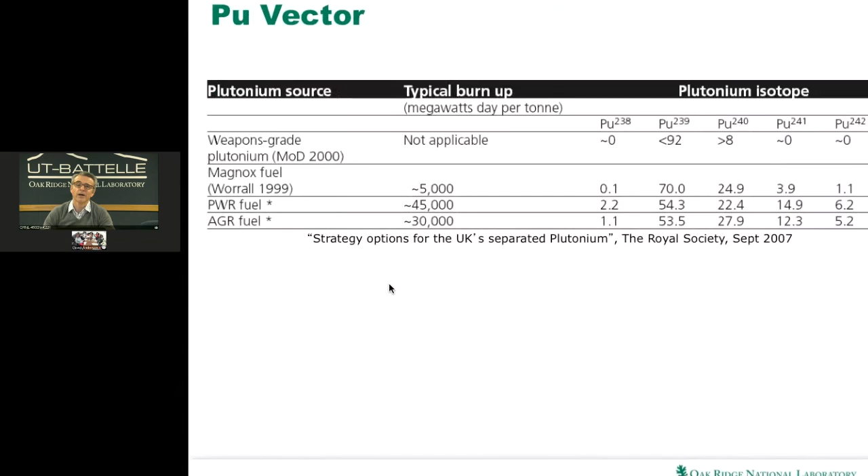So the other thing as well is the weapons grade plutonium majority is Pu-239. If you look at the Magnox fuel in the UK, again, quite a good fissile material, because that used to be the source of the UK's plutonium for their bomb program. So again, it's a nice reactor to generate plutonium. And then you see how those commercial reactors like the pressurized water reactor or the advanced gas cooled reactor notably affect the fissile quality, the 239 plus 241.

So why is that important? Well, the other thing you should also bear in mind is that the plutonium-241 concentration will also change with time, because Pu-241 decays to americium-241. And americium-241 is no longer fissile, so you actually over time lose your fissile quality. And also the americium-241, unfortunately, is also a neutron absorber.

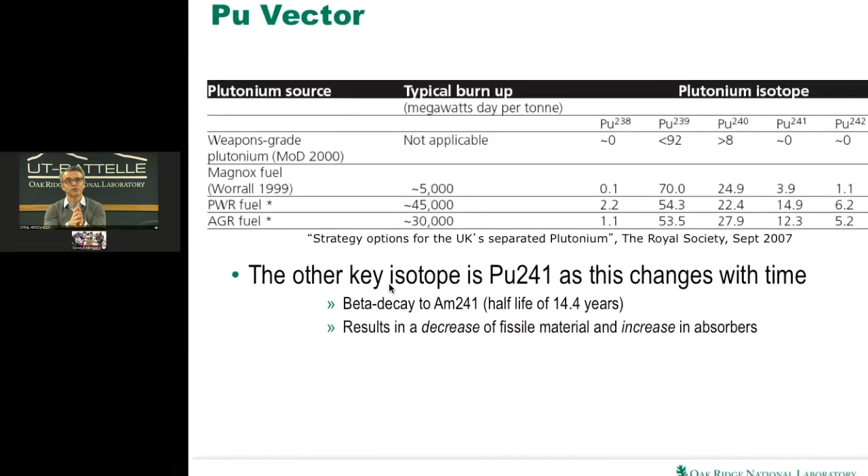So over time, if you've made a strategic decision to separate plutonium to reuse, it actually makes more sense to use it earlier, because you're going to be losing your fissile material over time. And unfortunately, the americium-241 is also a dose issue. And so again, if you're not careful, you're going to end up with a situation that you can't actually use it any longer in your fuel fabrication plant.

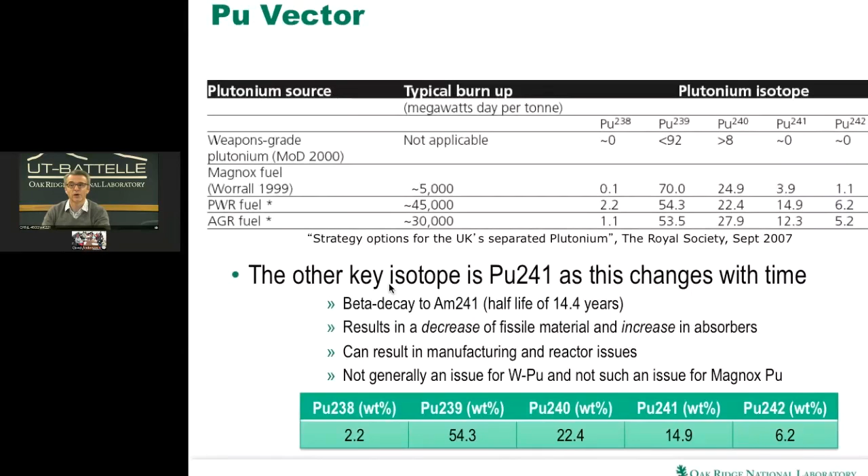Whereas if you're France, for example, and all your reactors are pressurized water reactors, then after only something like 10 years, your americium ingrowth has got to typically 3, 4, 5%, and that's certainly higher than fuel fabrication plants are able to tolerate. So you need to do something more quickly. So what they do is they load it into what's known as MOX fuel, mixed oxide fuel, and that's a combination of plutonium, which makes about 10% of the fuel, and the other 90% is depleted uranium. When we enrich uranium, the depleted material is the byproduct of the enrichment process.

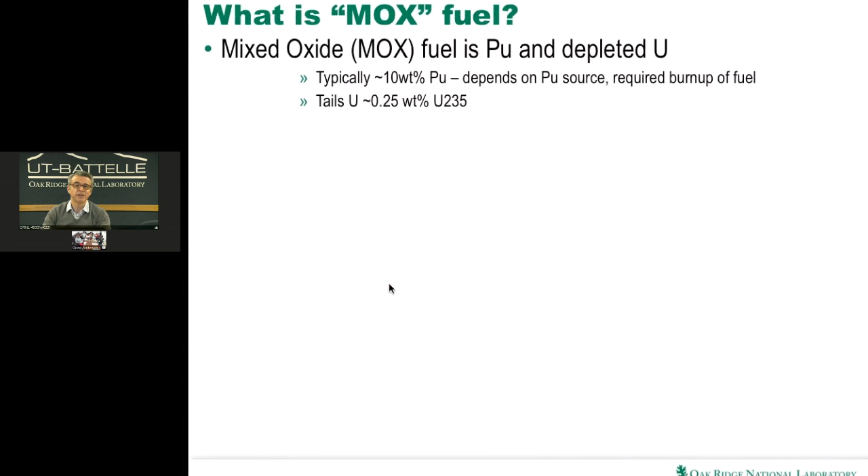So depending on how much energy we need to get out of our fuel, we increase the plutonium content. Tails uranium I mentioned is depleted uranium. We blend those together, we press them, we make it into a new fuel. And again, I'm not going into the details, just conscious of the time.

But you just have to be careful with this plutonium as well, because these plutonium isotopes are heat generators. So you have to be a little bit careful in terms of the fabrication process and so on. But the key point here really is that if you were to look at a fuel element that had MOX fuel in it versus one that had uranium only in it, you couldn't tell any difference.

They're actually identical mechanically. The only difference, though, is that in a MOX fuel fabrication plant, because of the dose from the americium, because of the dose and the heat from the plutonium, you need to make sure the shielding is in place. Glove boxes become incredibly important. There's a lot of automation in them, less hands-on operations compared with the uranium facility. And all of that, plus all the additional security that's necessary and so forth, makes MOX fuel very much more expensive than uranium fuel.

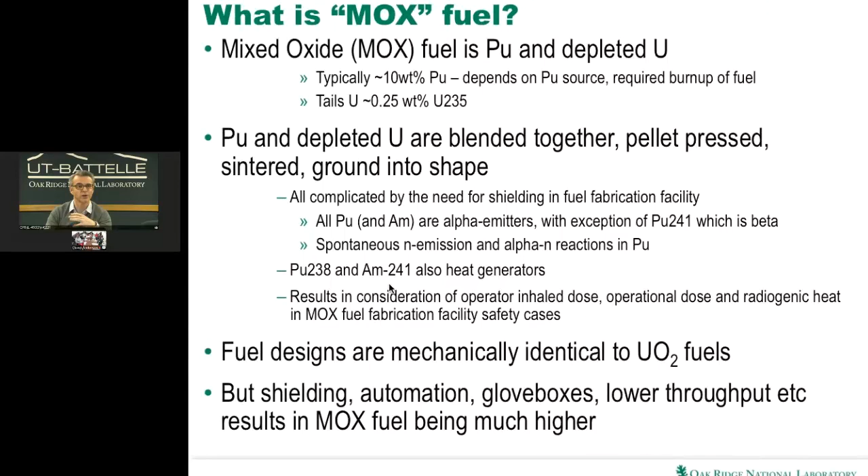And that's why, again, it doesn't seem to make sense today to go forward with MOX fuel on a commercial basis, unless you've already decided to separate for a different reason, back to the things I said earlier.

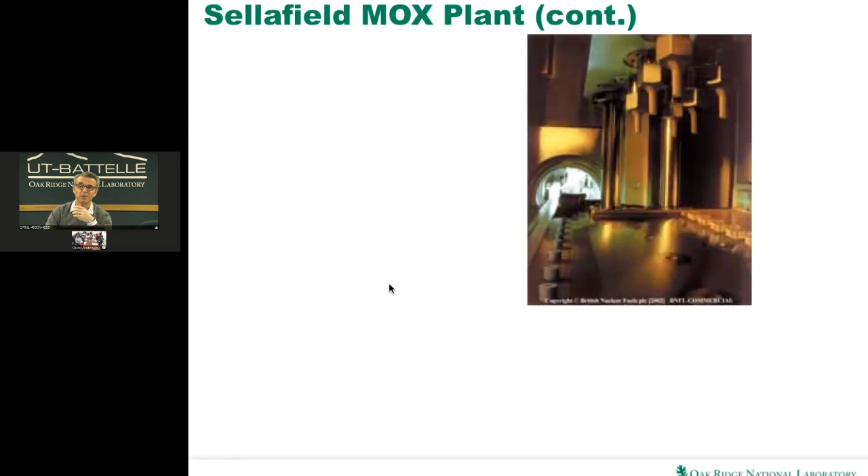So again, I'm not going to go into the details, but just to demonstrate the process: you mix the uranium and the plutonium together, you mill it together, and then you add pore formers and you produce pellets. This is just to show you some photographs of what these things look like. For those people who may not have seen what fuel pellets look like, it's pictures of fuel pellets being pressed. You're seeing the dies on the right-hand side that press those pellets.

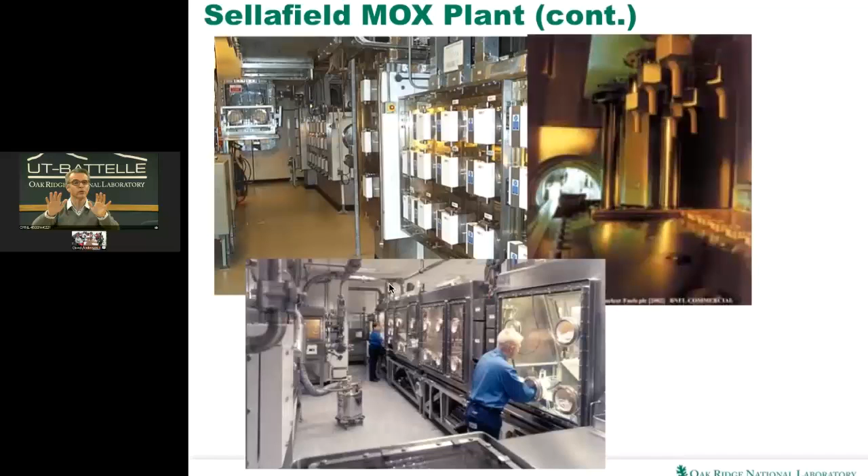And then, as I mentioned, everything's behind glove boxes. For anybody who's seen a fuel fabrication facility for uranium fuels, you don't see all these glove boxes. You can see much more clearly what's going on. It's not all inside containment, as you're seeing here. So you can see how much more difficult the operations become because of all the containment that's needed. You need either remote handling or glove boxes, so things like maintenance become very difficult.

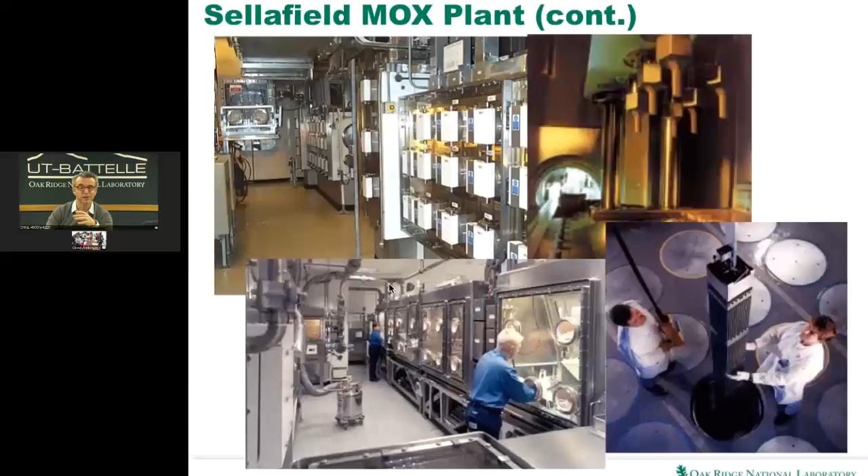Again, I'm not going to go into the details, because this is more my background in reactor physics; that's why I threw these in, because I find it quite interesting. But really the important thing is that MOX does actually have an impact on reactor operations. It's not something you can just load into a reactor without any consideration. You have to do new safety analysis. There are limitations on what you can do.

And the reason, unfortunately, is that plutonium preferentially absorbs neutrons. You've just fissioned uranium and plutonium and generated the neutrons you want, but the plutonium itself preferentially absorbs those neutrons that other materials, such as the control rods and the shutdown systems of the reactor, need to utilize. So it reduces the absorbing worth of control rods, of the coolant, of the burnable poisons, and so on. Again, I'm not going to go into detail; this is just for your broader knowledge.

But also things like how you control the reactor using delayed neutrons are affected, because the number of delayed neutrons is reduced. You can mitigate some of the effects. You can do things in reactor operations, in your safety analysis, you can put in extra control systems. But generally what people do is simply limit the fraction of MOX fuel that's allowed in the reactor.

So normally it will be 100% of the reactor is uranium fuel, of course, but we tend not to load 100% of the reactor as MOX fuel. If you look in France and other places, typically 1/3 of the reactor is loaded as MOX fuel and 2/3 as uranium fuel. Again, the details aren't so important, but the fuel performance itself is also affected by the presence of plutonium. And again, I'm not going to go into the details.

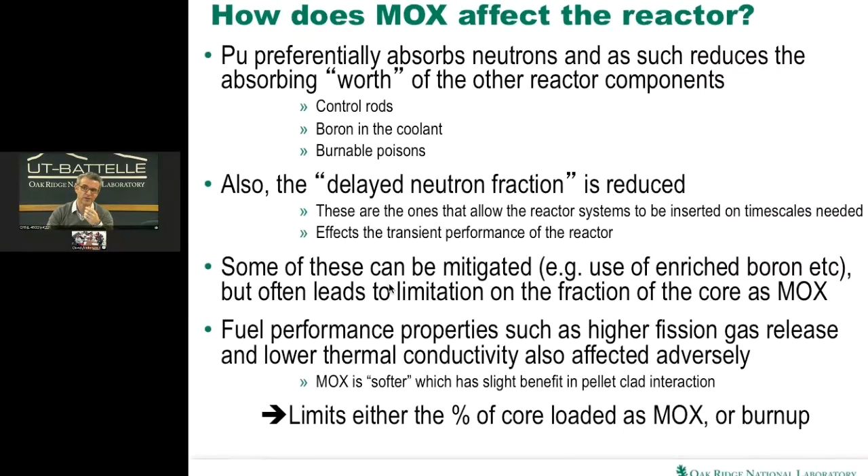But the key takeaway again from all of this is that generally MOX fuel A costs more and B has an operational impact on the performance of your reactor that you have to mitigate against by a range of things that I've listed here. So that's the takeaway from this really, it's not quite as simple as using uranium fuel.

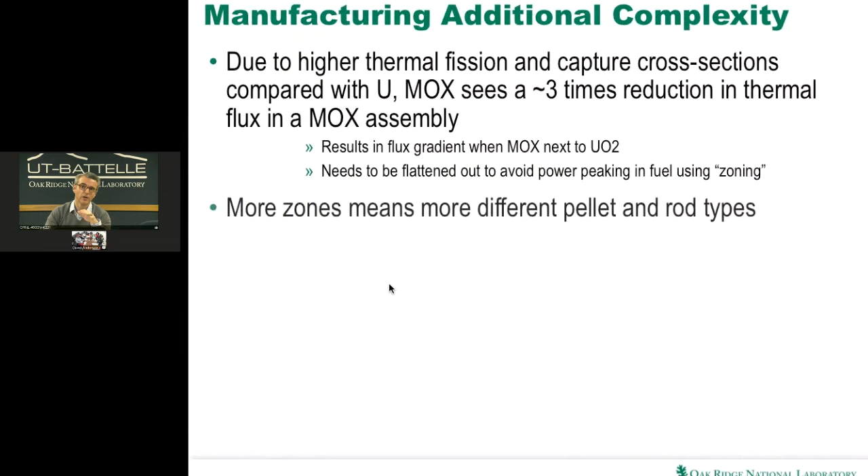The one thing I would say though is that the plutonium and therefore the MOX fuel does have a much higher spontaneous fission neutron output than uranium, and because of that has a much higher decay heat. Because of all the decay heat considerations, you end up with something like a factor of 3 or 4 more heat in a MOX fuel assembly than in the uranium fuel assembly. So that has significant implications on the spent fuel pools at the reactor, but also on your repository performance if you are considering putting MOX fuel in your repository. So again, there are spent fuel issues to be concerned with.

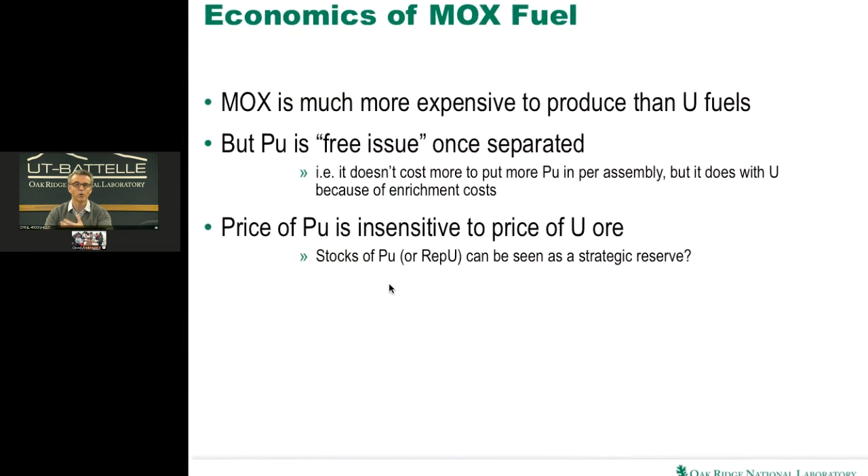I've already touched on this before, so I won't spend time on this, but just to reiterate, MOX is much more expensive than uranium, typically 2, 3 or 4 times. But if you've decided you want to go ahead with recycle for a whole range of other reasons, plutonium is free issue once it's separated, and it does give you the benefit because it's free. You can load more and more and get more energy out of your fuel.

Also, the price of plutonium is insensitive to the price of uranium ore. So if you are sitting on a stockpile of plutonium like the UK and France, if suddenly there's a huge dash to uranium and ore prices spike, which they have done in the past, you can offset those costs with a bit of a strategic reserve by reusing your plutonium or indeed your reprocessed uranium. And again, overall, as mentioned, there's reducing the volume in the repository and the impact there.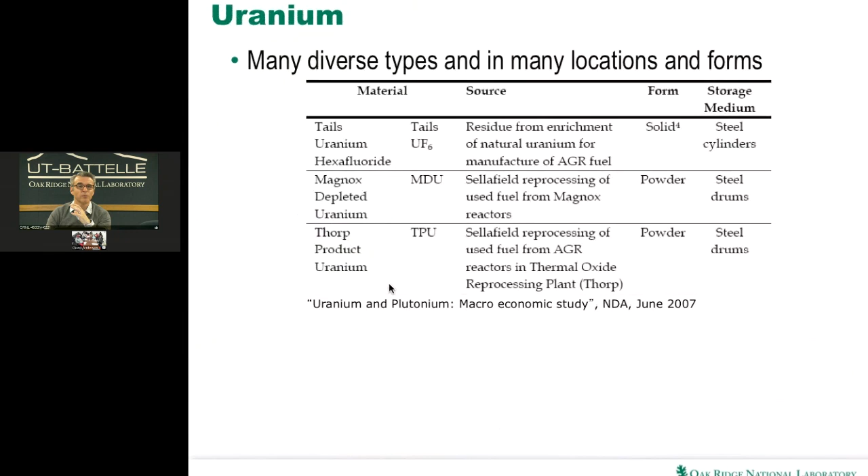You can also reprocess the uranium. There's a lot of uranium around different parts of the world, and this is just to illustrate from a report from the Nuclear Decommissioning Authority, the NDA. There's a range of tails uranium, depleted uranium, reprocessed uranium, and the isotopics in that reprocessed uranium depend on a range of factors, exactly the same factors as the plutonium isotopics.

Just an illustrative example, if you look at the composition of the reprocessed uranium, typically it's dominated by U-238, and U-235 is left at about 0.9%. You started with about 4 or 5 when you first put the fuel in the reactor. It's now fissioned and depleted down to about 0.9, but you've also produced the other uranium isotopes. It really doesn't have a huge effect on the reactor itself, so that's quite useful, but you do have to be careful because the U-234 and U-236 actually absorb neutrons. They don't contribute to fission, so you need to over-enrich the U-235 to compensate.

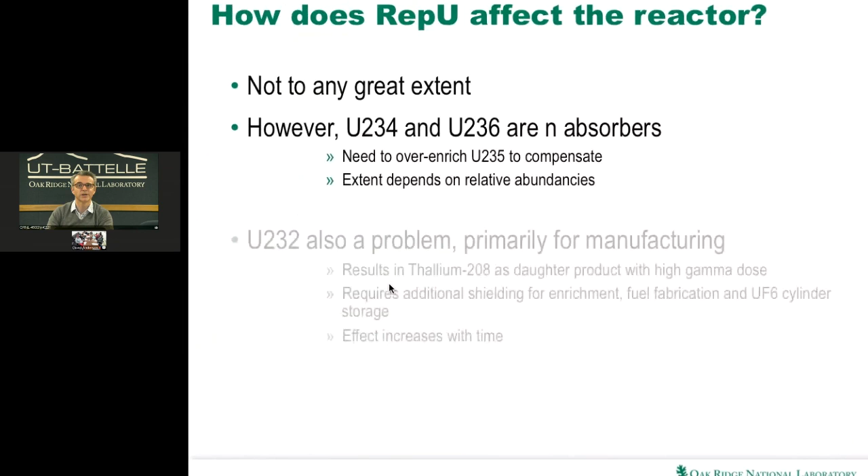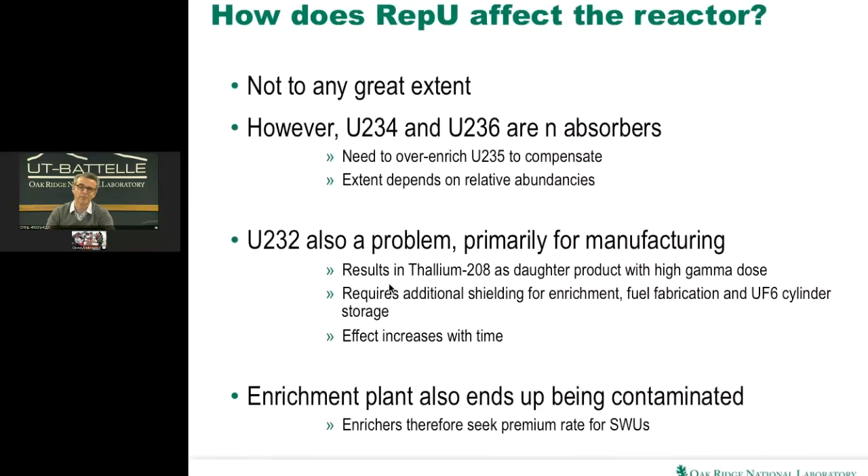And the other thing, which is of interest to the thorium fuel cycle also, is that the U-232 byproduct has quite a significant daughter product, thallium-208, that has a very high gamma dose, a 2.6 MeV gamma. So if you're considering recycling uranium, you then need to think about the shielding implications on your fuel fabrication plants. And that effect increases with time because over time you'll grow in more U-232. It also means that your enrichment plant and all of your standard uranium fuel cycle plants have now been contaminated with these materials.

So you can recycle. It's known as enriched reprocessed uranium once you re-enrich it into a new product. There are other options to maybe use that material, down blending HEU from surplus weapons programs. And in fact, there's a program of work currently going on with Canada and also in South Korea, where they're using the reprocessed uranium from light water reactors and are able to load that directly into a CANDU reactor, because CANDU reactors don't need enrichment, they just need a natural background, 0.7% U-235.

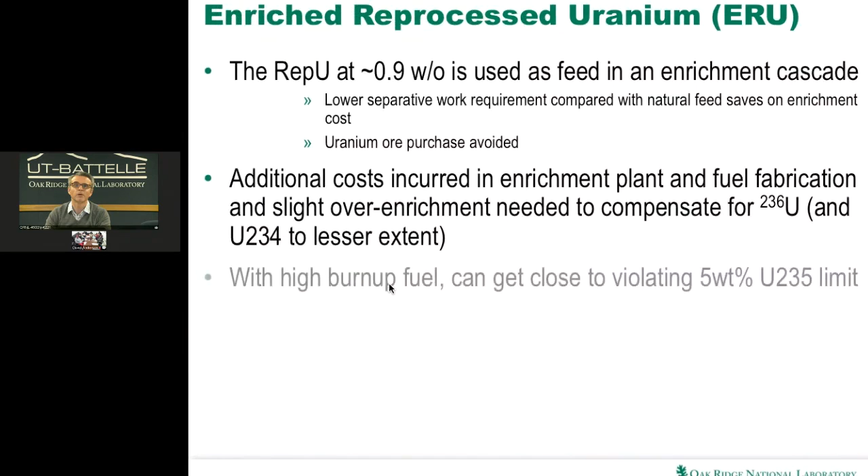Again, not going to talk about this. This is just to illustrate some of the points I've already made about the additional costs and the violation of limits and so on. So I'm not going to go into this. It's probably a bit too detailed for what you need. So just to come back to the reprocessing and cover this from a non-proliferation and safeguards perspective.

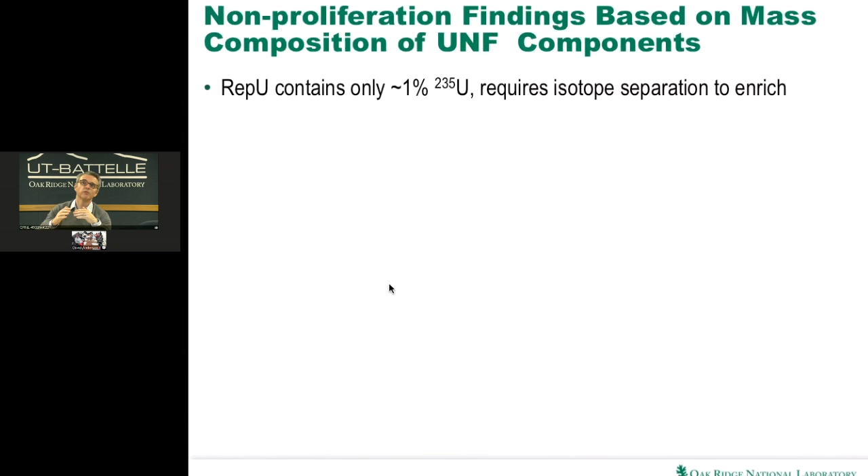There are a whole range of obviously concerns with non-proliferation and safeguards. Usually it's about material attractiveness, so that's one we focus on. But you have to bear in mind that if you look at the reprocessed uranium that comes from recycling, as I said, the U-235 content now is very low, typically 1% or less of U-235, and you need isotope separation, re-enrichment to take that any further.

However, with the plutonium that comes from that, typically you've got about 50 to 80% fissile. And again, if you look at Chuck Bathke's work on the figure of merit and the material attractiveness, he demonstrates that that material, that plutonium quality, is still sufficient for a weapon, still weaponizable, has material attractiveness.

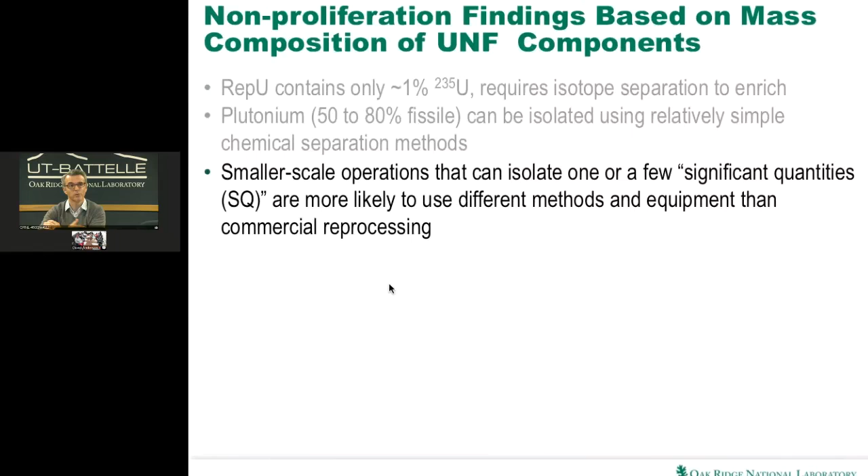There are smaller scale operations other than commercial reprocessing that can be used to isolate just a few significant quantities. And again, they're more likely to use different methods than commercial reprocessing plants. And again, that's just something to bear in mind. There's often a big difference between research programs that are going on around the world and significant commercial reprocessing plants. So just bear in mind that different techniques can be used depending on the application.

But the conclusion from all the studies, and this Chuck Bathke one I keep alluding to, is that really plutonium has no intrinsic safeguards. Because plutonium is plutonium, it can be used in a weapon. You therefore do need to have safeguards. But because you've got plutonium in all of the fuel cycles, irrespective of whether you're separating it or not, you still need safeguards and security for every single fuel cycle. And again, guns, guards, gates, and all the other things that go along with that.

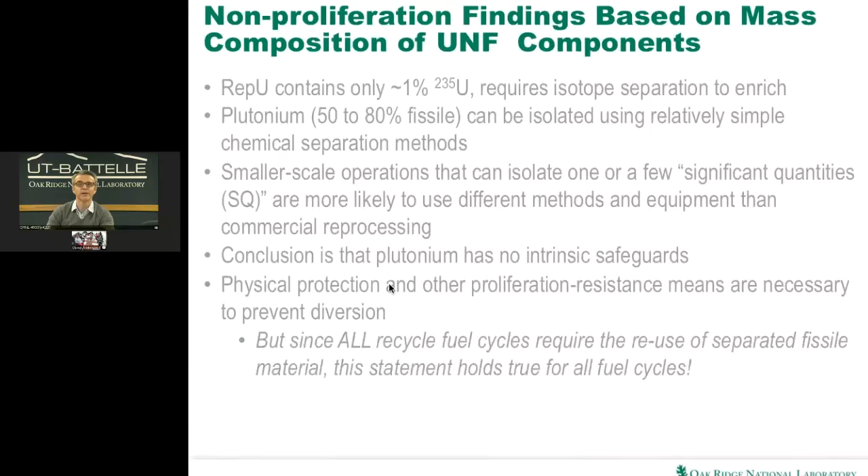And as I said, since all fuel cycles end up with some form of separated fissile material, then it holds true for all fuel cycles. You need safeguards in all fuel cycles, regardless of whether you reprocess or not. Just going back to what I said before, there are a range of options though where people, for a variety of reasons, safeguards reasons and so forth, do not want people to have separated plutonium. So there are technologies to try and keep those together.

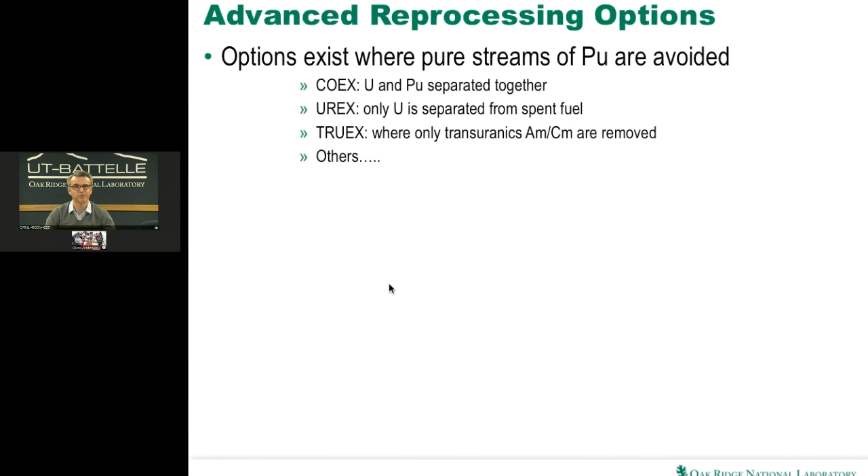And again, that's just to reiterate what I said earlier, coming back full circle, that these are some of those advanced techniques. But there is this concept called safeguards by design. So in a sense, the chemical processing is safeguards by design, by not separating materials into different streams and trying to keep everything together.

There is also safeguards by design in this context where, if all of the processes where you could separate out and divert material are kept in one facility, so that's everything from the time the spent fuel arrives to the time you shear and then separate all the material and then make new fuel, if all of that is inside one controlled area, then from a safeguards perspective, all you need to be monitoring is how many spent fuel assemblies come in and how many fresh new assemblies go out.

And monitoring positions through all of that then minimize the opportunity for diversion of that material. And that's what you see here, this idea of co-location and integration of the separation streams and also the new fuel assemblies.

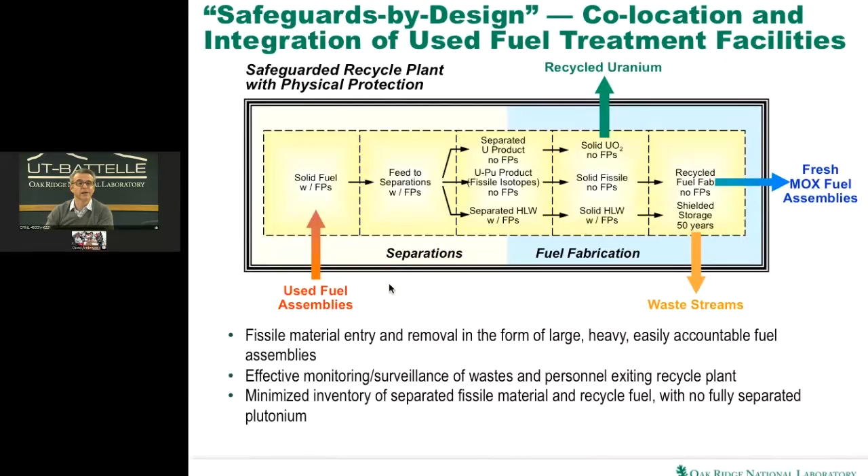So again, fissile material entry and removal is in the form of large and heavy fuel assemblies, so A, it's kind of easy to account for, and B, it's hard to divert those large assemblies. And then as long as you are continually monitoring and surveying the wastes and the personnel exiting the recycle plant, then it's easy for you to make sure that nothing's being diverted. And also you don't have fully separated plutonium, so all of these potential risk elements you're avoiding by safeguards by design, building that into the flow sheet that you start with.

So to conclude, just a brief summary and conclusion. Despite what people may think, the US once-through fuel cycle is not the only option. There are many other options out there. As I mentioned, many countries around the world, such as France, UK, South Korea, Japan, Germany, Belgium, many others, are doing other fuel cycles that involve separation, reprocessing, and then recycle. Not everybody has taken that all the way through to ultimate recycle in fast reactors, but that's the direction that many people are going, including indeed the US, looking at future fuel cycle options.

But again, people often point to these advanced fuel cycles and say, well, you're not able to demonstrate them. And that's true. And in fact, unfortunately, we're not yet able to also demonstrate the once-through fuel cycle because we haven't actually put any spent fuel in a repository. The closest people are Sweden and Finland. They're getting pretty close to doing that, but they're still not quite there yet.

Something that I just wanted to mention in wrap up is that often people think that the US has a moratorium and a ban on reprocessing because of the Carter administration back in the 70s. But that's actually not true. That did happen, but in fact in 81 Reagan lifted that moratorium, and so reprocessing is actually not banned in the US. It's something that people either don't care to realize or don't follow the history and read that part. But basically, reprocessing is not banned in the US. It just makes absolutely no commercial sense. That's the main reason.

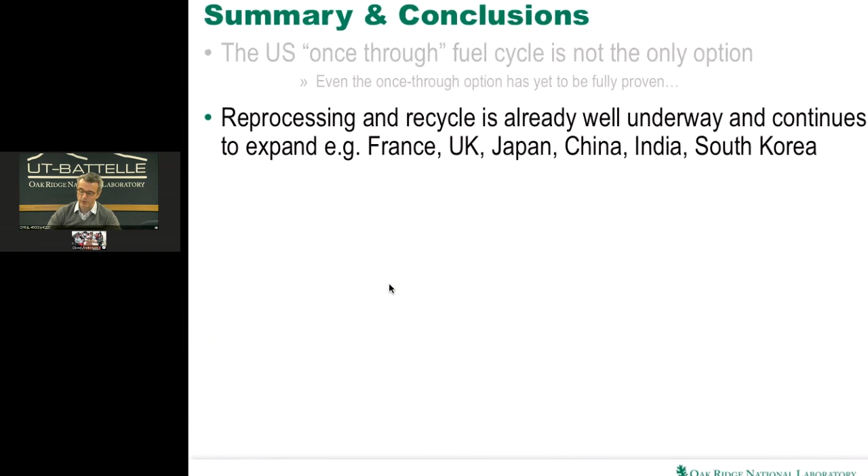So the other thing as well is back to the Carter administration. The idea was that if the US leads by example and doesn't reprocess, then nobody else in the world will reprocess. But as my list there suggests, that didn't work out quite as expected. Because despite the US not reprocessing, many other countries did reprocess, and they are continuing to reprocess. And added to that list is China, India, South Korea, and that list is probably going to grow. So I think because of that, there is potential that the US may think about reprocessing or future fuel cycles at least, because as the world grows and energy demand for nuclear grows, it puts new pressure on uranium ore and therefore it makes sense to recycle potentially if the economics is right.

There are a huge range of different drivers likely to affect the future's choices. As I said, the US policy on not reprocessing has had limited impact on the rest of the world's choices. So I think that's something for us all to learn, is that other countries will do what they see as right for their policy, and understanding what their policy is is very, very important.

Another point that I've underlined hopefully a few times is there is no such thing as a proliferation resistant fuel cycle. Advocates of certain technologies will tell you, for example, the thorium fuel cycle is proliferation resistant. It is not. U-233 is the most fissile substance known to man, and the IAEA treat the U-233 classification exactly the same as plutonium, in fact higher than enriched uranium-235. So there is no such thing as a proliferation resistant fuel cycle, simply because we need fissile material in a fuel cycle. That's how we get energy out.

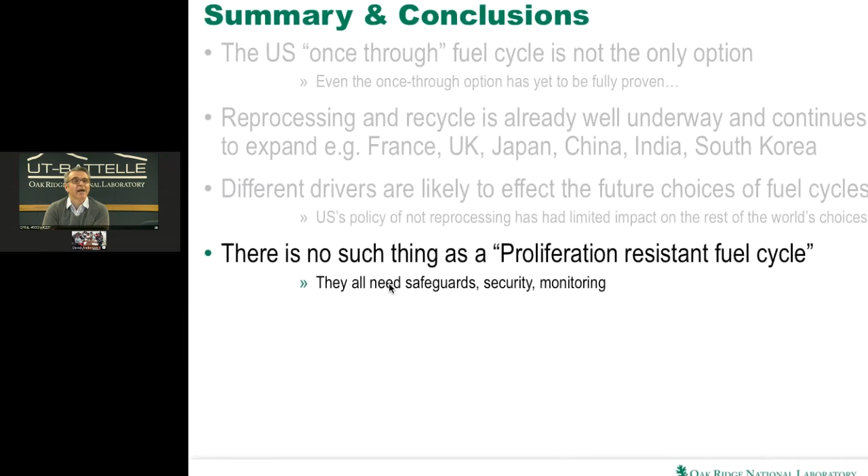So if there's fissile material, we'll need safeguards, and we'll need security, and we'll need monitoring. But engineered safeguards and safeguards by design as a concept can be used to provide additional protection beyond standard safeguards approaches, and ensure a whole level of barriers and levels of monitoring.

But really the cost of implementing any future fuel cycle technology, recycle or others, thorium, plutonium, whatever it may be, will be a significant challenge for the industry. It's a significant challenge in terms of cost. It's a significant challenge in terms of risk. And as you've probably seen around the world, there is a lot of talk about new nuclear energy, but it's limited because of the cost and the risk that people don't want to take, because the economics just doesn't stack up right now. So for the significant investment, it's unlikely to happen for a while, and will probably need governments to intervene and have government programs rather than on a commercial basis alone.